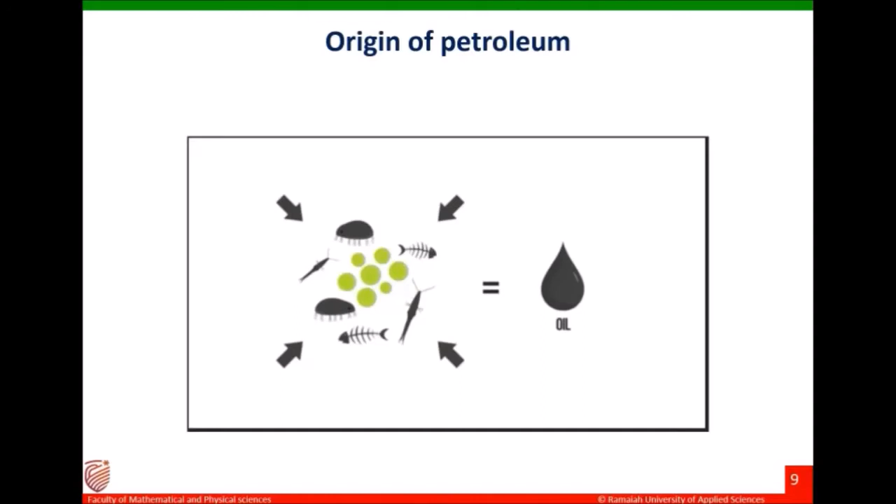Natural gas was formed by the same process as oil but was exposed to more pressure and heat, causing it to further decompose and turn into gaseous form. At the molecular level, oil and gas are hydrocarbons made up of hydrogen and carbon atoms.

The constant pressure and movement of the Earth's crust squeezes the oil and gas through the pores or spaces within the rocks. Some oil and gas reaches the Earth's surface and seeps out naturally into land or water. Often, it is trapped beneath the surface by impermeable layers of rock structures like rock faults.

Within the crust, oil or gas deposits build up and form reservoirs. Reservoirs are like vast sponges filled with oil and gas. They can be as large as a city.

To find oil and gas deposits, geologists use a number of different survey techniques, including seismic surveys, gravitational surveys, and geological mapping. Seismic surveys use reflected sound waves to produce a 3-dimensional view of the Earth's interior. New technologies such as 4-dimensional projections and sophisticated graphic renderings of rock structures are improving the way we find conventional oil and gas deposits. Energy resources that are currently difficult or expensive to extract are called unconventional oil and gas.

Oil has become the most important source of energy since the mid-1950s and became the lifeblood of the industrialized nations. Its products underpin modern society, mainly supplying energy to power industry, heat homes, and provide fuel for vehicles and aeroplanes to carry goods and people all over the world.

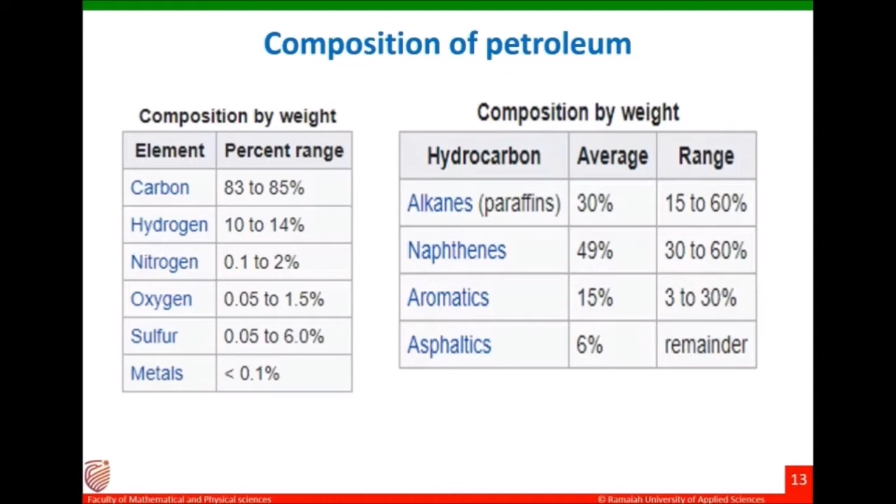What is petroleum refining? As such, petroleum cannot be used as a fuel. By the fractional distillation of petroleum, we can get useful products such as refinery gas, gasoline, naphtha, kerosene, diesel oil, lubricating oil, fuel oil, greases, wax and bitumen.

All these useful compounds differ in the number of carbon atoms present in their molecules. For example, refinery gas mainly contains hydrocarbons with 3 or 4 carbon atoms. Gasoline is a mixture of hydrocarbons where the number of carbon atoms in the hydrocarbon chains ranges from 7 to 9. For naphtha, it is 6 to 11. Kerosene is 11 to 18. Diesel oil is 11 to 18.

Lubricating oil, 18 to 25. Fuel oil, 20 to 27. Greases, 25 to 30. Bitumen, above 35.

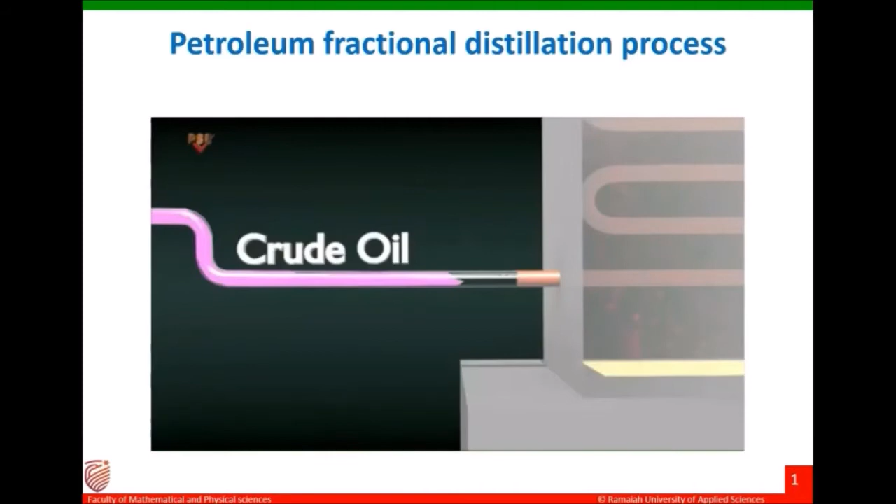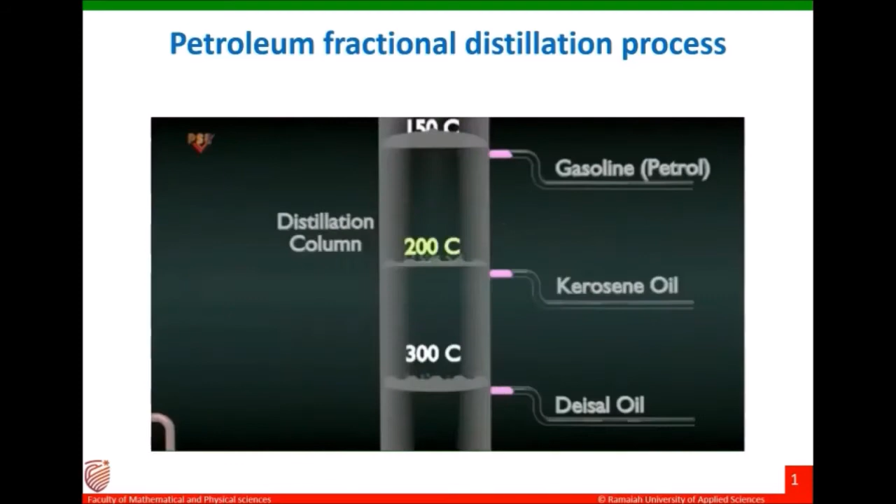To simplify the petroleum distillation process, we consider one distillation tower in which distillation takes place. Crude oil is supplied to a furnace before adding it into the distillation tower where it is heated. The heated mixture is fed into the bottom section of the tower. This bottom section is the hottest point, where the temperature can reach as high as 400 degrees Celsius. Components which are not vaporizable at this temperature become the lower bottom products. Components in vapor form rise up through a different series of distillation stages. The temperature decreases as the vapors rise through the tower and the components condense.

The products obtained from each distillation zone are known as product streams. Products from the distillation range from gases at the top to very high viscous liquids at the bottom. In all cases, these product streams are considered unfinished products, and further processing is required to make useful products. Light products separated at the top contain propane, butane and isobutane. This stream is also known as petroleum gas, and it can be liquefied to produce liquefied petroleum gas, or LPG.

Gasoline stream is used as a good fuel for automobiles. Naphtha stream can be utilized to convert to gasoline by the reforming process, which we will discuss in the next video. Kerosene can be treated to obtain jet fuels. Heavier oils such as fuel oil can be converted into useful fuels by cracking techniques, which we will study in the next video. The process depends on the quality of the petroleum as well as market demands. The lower products, asphalt or bitumen, are used for construction.

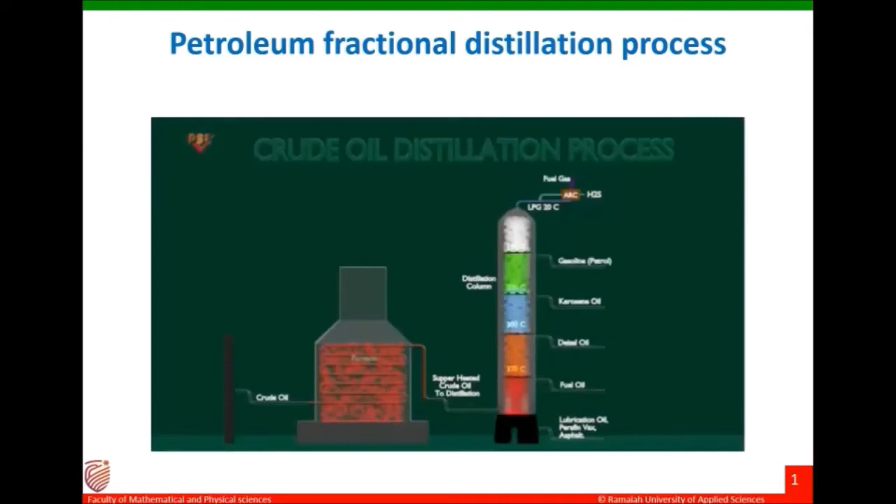Now we will summarize the petroleum distillation process. Crude oil from the field is a mix of hydrocarbons of different molecular lengths. By fractional distillation, the components in crude oil can be separated, and this process is known as petroleum distillation. During this process, low molecular weight hydrocarbons separate first due to their low boiling points, and higher molecular weight hydrocarbon mixtures separate later. Very high molecular weight hydrocarbon mixtures remain at the bottom of the distillation column.

Now we will summarize the video. In this video, the following questions were answered: How was crude oil formed on Earth's crust? What is the significance of petroleum in the present scenario? What is the composition of petroleum? What is the principle behind the separation of useful products from petroleum? Explain the petroleum distillation process. What are the products obtained from distillation of petroleum? Thank you for watching the video.

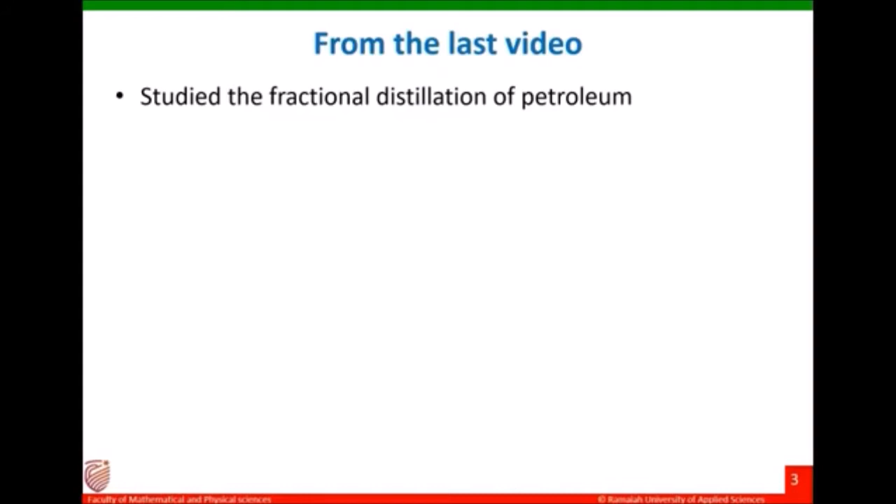From the last video, we studied about the fractional distillation process of petroleum to obtain useful products. The major products in the fractional distillation column are refinery gas, also known as petroleum gas, which contains 3 to 4 carbon atoms in their hydrocarbon chains.

Petrol contains 7 to 9 carbon atoms in their hydrocarbon chains. Kerosene, 11 to 18 carbon atoms. Naphtha, 6 to 11 carbon atoms. Diesel, 11 to 18 carbon atoms. Fuel oil, 20 to 27 carbon atoms. Lubricating oil, 18 to 25 carbon atoms. Waxes, 25 to 30 carbon atoms. Bitumen, above 35 carbon atoms.

The products separated during the fractional distillation process were based on their difference in boiling point. Lower molecular weight hydrocarbon based products, which separate at a lower temperature, for example refinery gas, petrol, etc. Higher molecular weight hydrocarbon based products are separated at higher temperatures, for example fuel oil, lubricating oil, etc. Very high molecular weight hydrocarbon based products will be at the bottom of the distillation column, and they won't vaporize in the column.

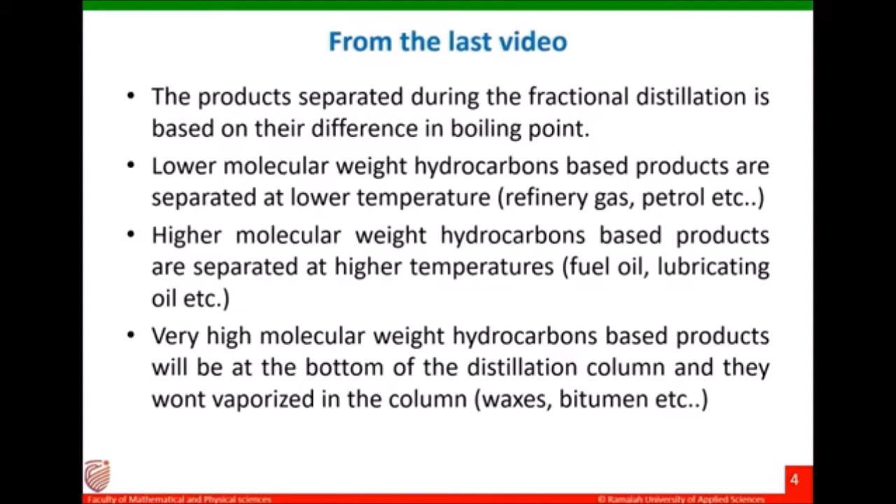For example, waxes, bitumen, etc. Among these fractional distillation products, which products are more useful? Widely used and more useful products are low molecular weight hydrocarbon based fuels, example refinery gas, petrol, etc. Higher molecular weight hydrocarbon based products such as fuel oil do not have much commercial value. Higher molecular weight oils are also known as heavy oils.

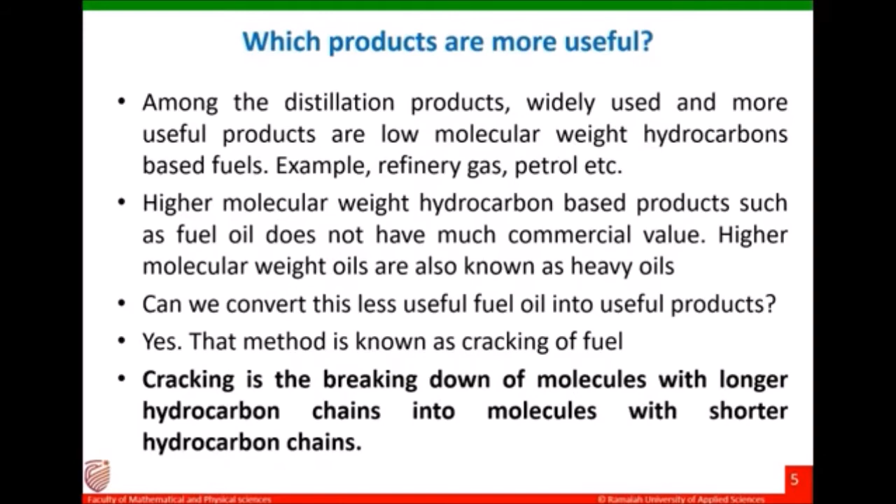Can we convert these less useful heavy oils into useful products? Yes, and that method is known as cracking of fuel. So the definition of cracking is this: cracking is the breaking down of molecules with longer hydrocarbon chains into molecules with shorter hydrocarbon chains.

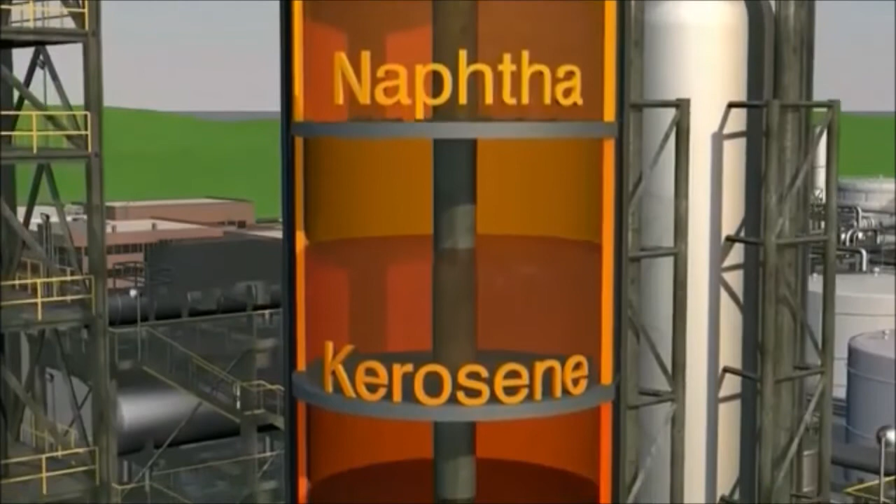This process you can achieve with the help of heat as well as stacks of trays. The liquid is easily collected and separated by weight. The lighter and medium weight liquids require less processing before they're ready to be used in cars and trucks. The heavier liquids need more processing to become useful.

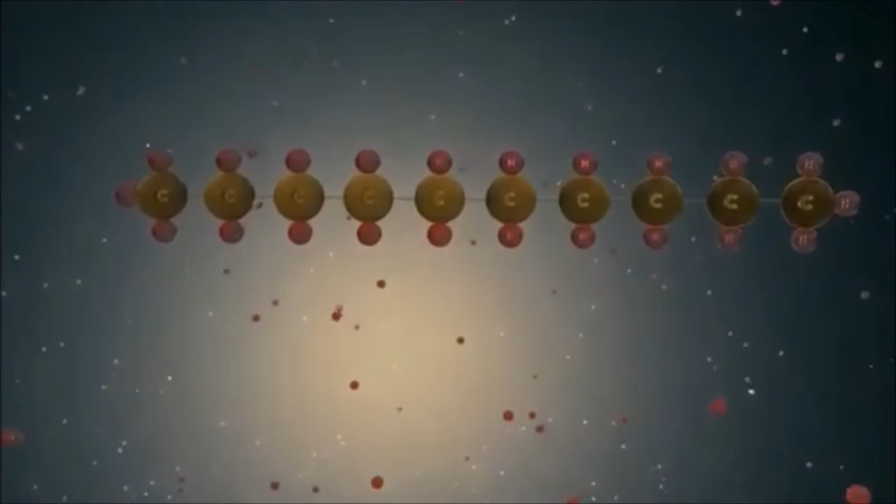A process called cracking is used to maximize the usefulness of heavy oil. Heavy oil has long strings of carbon and hydrogen molecules. Using a catalyst, these molecules can be broken into smaller chains, transforming the heavy oil into lighter, more valuable fluids.

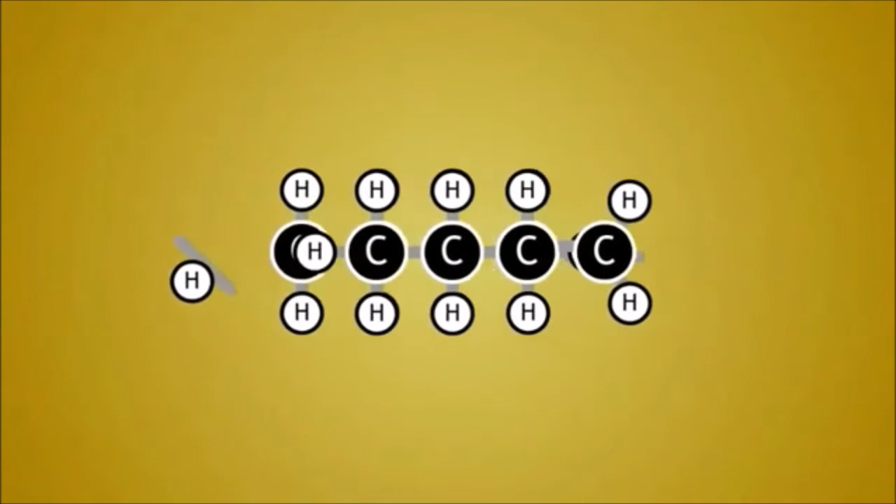We use a lot of fuels in our day-to-day lives, driving cars, aeroplanes, lorries, and even heating our homes. This means there is a very high demand for small-chain hydrocarbons. However, after fractional distillation, we find that we have a large supply of long-chain molecules. The process of cracking breaks down long-chain alkanes into a smaller alkane and alkene molecule.

This allows the supply of short-chain hydrocarbons to meet the demand for them, as the longer-chain alkanes are broken down into shorter alkanes and an alkene. The alkenes are also useful as these can be used in the manufacture of plastics.

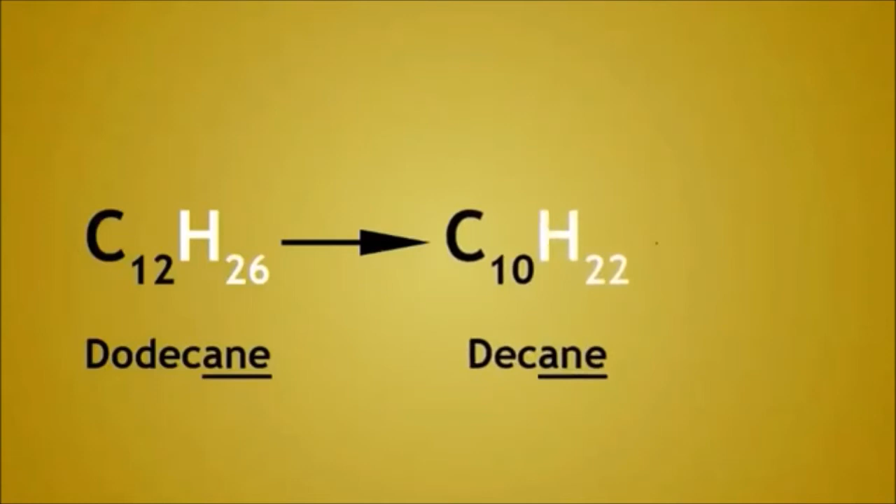Here is an equation showing that C12H26 is broken down into octane and butene. There isn't a set way that these molecules are broken down. In fact, C12H26 could also be broken down into decane and ethene, or even butene, pentane and propene, as these equations show. The large hydrocarbon is broken down in quite a random way. Just note that in each equation, since we had 12 carbon atoms and 26 hydrogens going into the reaction, the same must come out.

Types of cracking: cracking can be done with the help of heat, and that type of cracking is known as thermal cracking. Thermal cracking can be done in two different ways: liquid phase cracking and vapor phase cracking. Cracking can also be done with the help of a catalyst, which is known as catalytic cracking. Catalytic cracking can also be done in two different ways: fixed bed catalytic cracking and fluidized bed catalytic cracking. So cracking can be done in two different ways: thermal cracking and catalytic cracking.

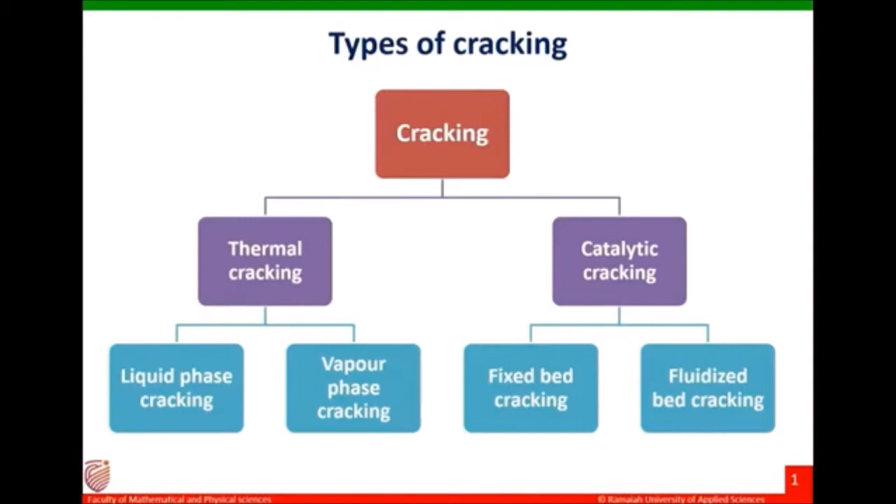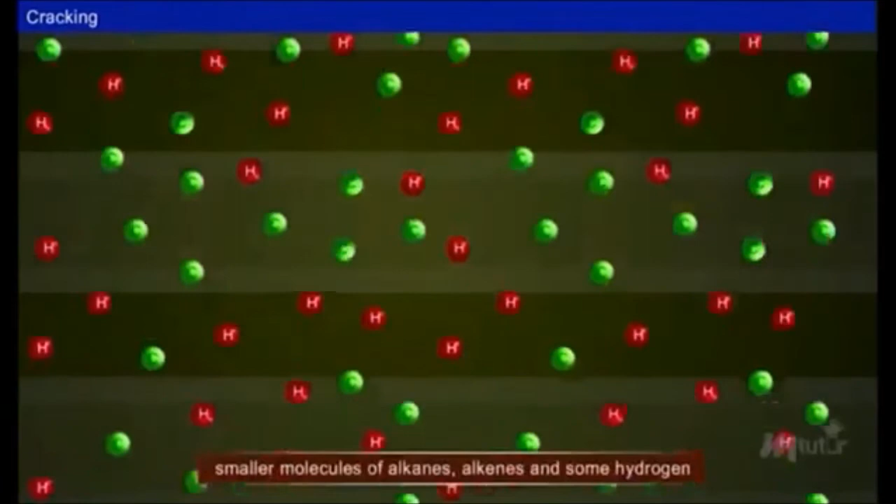Carbons. There are two methods of cracking in use: thermal cracking and catalytic cracking. Thermal cracking is cracking that is carried out by the application of heat and pressure. Here, the bigger hydrocarbon molecules break down to give smaller molecules of alkanes, alkenes, and some hydrogen. This process may be carried out either in liquid phase or vapor phase.

Liquid phase thermal cracking: the heavy oil is cracked at a temperature of 475 to 530 degrees Celsius and pressure of about 100 kilograms per square centimeter. The cracked products are then separated in a fractionating column.

Vapor phase thermal cracking: this type of cracking is suitable for oils which may be readily vaporized. The crude oil is first vaporized and then cracked at about 600 to 650 degrees Celsius under a low pressure of 10 to 20 kilograms per centimeter square.

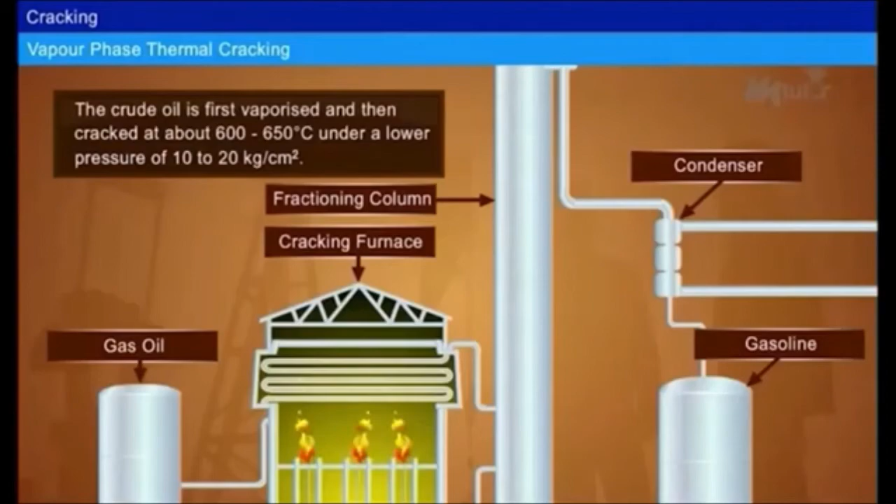Thermal cracking can be done in two ways: liquid phase thermal cracking and vapor phase thermal cracking. In liquid phase thermal cracking, heavy oil is pumped into the coil, kept at 420 to 550 degrees Celsius under a pressure of 15 to 100 kilogram per centimeter square. Here the pressure is quite high. Good quality of gasoline is produced at this temperature.

Gasoline with low octane value around 60 to 70 is obtained, which can be mixed with a higher octane value gasoline and then be used in automobile. What is octane number? That we will study in the next video.

Vapor phase thermal cracking: here the heavy oil is heated in a heater at 400 degrees Celsius to convert it into the vapors. Then these vapors are passed into the reaction chamber, which is maintained at a temperature of 600 to 650 degrees Celsius under the pressure of 10 to 20 kilogram per centimeter square. Here you see the pressure is lesser than that of liquid phase thermal cracking.

And the kind of petrol that we get is of high quality in vapor phase thermal cracking, where you can get an octane number up to 75 to 80.

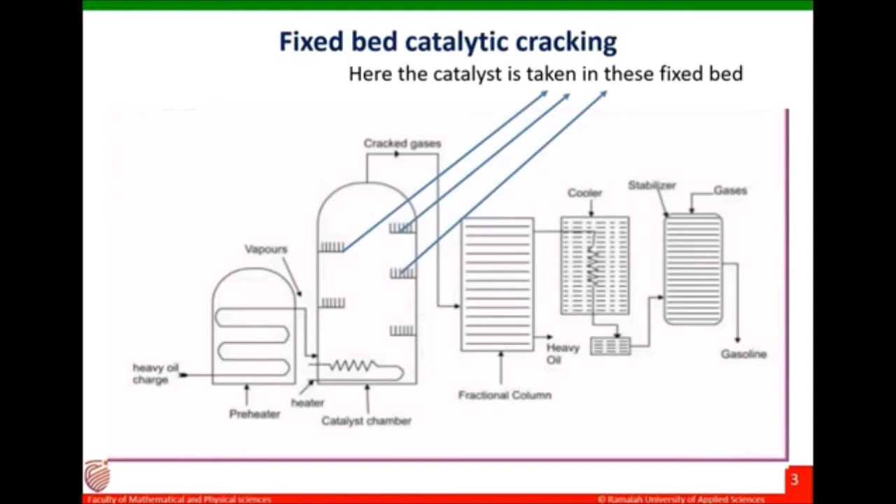Catalytic cracking can be done in two ways: fixed bed and fluidized bed. In fixed bed catalytic cracking, there is a catalyst chamber with beds where the catalyst is fixed, and heated heavy oil is passed through it. The oil is heated with the help of an electric heater, and that heated oil is passed to the catalyst chamber where the catalyst molecules collide with the heavy oil molecules, converting them into lower molecular weight hydrocarbons, which we can separate using a small fractional distillation column to get the lower molecular weight hydrocarbons.

So in fixed bed catalytic cracking, vapors of the heavy oil are heated in the presence of catalyst, due to which a better yield of petrol is obtained. Heavy oil is vaporized by heating in an electric heater, and vapors are passed over a series of trays containing the catalyst, generally using aluminum silicate, bentonite, bauxite, or zeolite. The reaction temperature will be somewhere around 425 to 540 degrees Celsius and a pressure of 1.5 kilogram per centimeter square.

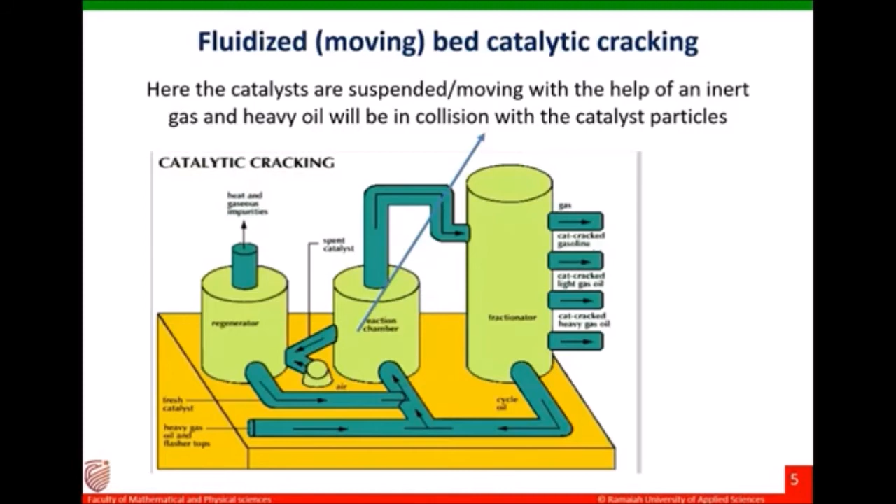In fluidized bed catalytic cracking, there is a reaction chamber where the catalyst is suspended or moving with the help of an inert gas. During this movement, heavy oil molecules collide with the catalyst particles, and the number of collisions is very high because of the movement of the catalyst. So the heavy oil molecules are converted or split into lower molecular weight hydrocarbons, which we can separate using a small fractional distillation column to get the lower molecular weight hydrocarbons separately.

So in fluidized bed catalytic cracking, we supply heavy oil fraction, and the catalyst generally used is aluminum oxide and silicon dioxide, which should be in finely powdered form. Temperature should be 550 degrees Celsius, pressure 1 to 2 atmosphere, and time only 3 to 4 seconds. That's why fluidized bed catalytic cracking is now widely used in industries, mainly in refineries, with a production yield around 70%.

So in this video we learned what is cracking, why it is necessary in the petroleum industry, types of cracking and their characteristics.

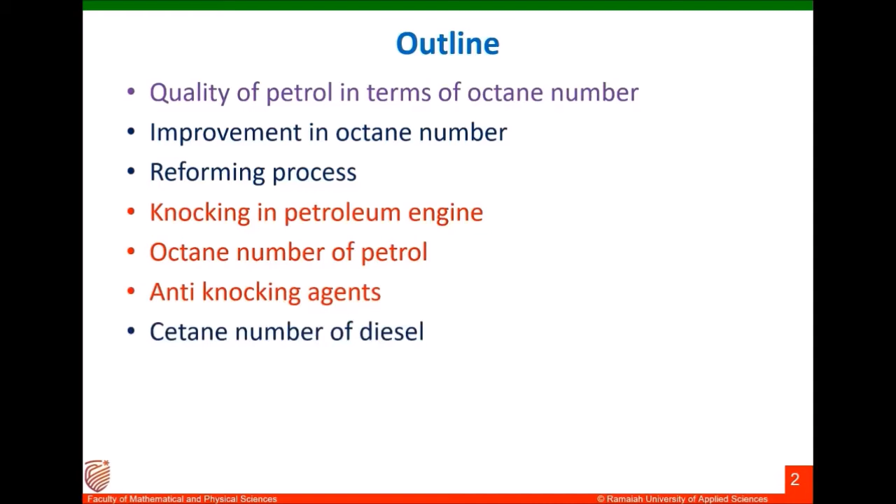In the previous video lectures, we studied that petrol or gasoline is derived from crude oil by the fractional distillation process. We also studied that the distillation products need further processing to use as finished fuel products. Quality of the fuel products depends on the source and quality of crude oil, the fractional distillation process, and the post-fractional distillation processes that we do after fractional distillation.

Quality of gasoline or petrol is mainly determined by its octane number. We will study about octane number and its definition by the end of this video lecture. If the gasoline has a higher octane number, it will create less knocking in the engines. If it has a lower octane number, it will create larger knocking in the engines. We will also study about knocking by the end of this video lecture.

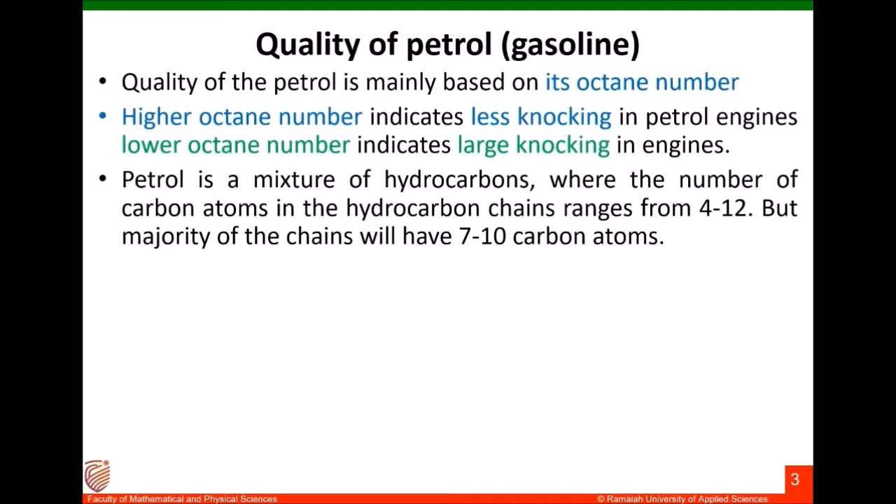Petrol is a mixture of hydrocarbons where the number of carbon atoms in the hydrocarbon chains ranges from 4 to 12, but the majority of chains have 7 to 10 carbon atoms. The hydrocarbons present in petrol are paraffins or alkanes, olefins or alkenes, cycloalkanes, cycloalkenes, aromatic compounds, etc. Among these hydrocarbons, some compounds are linear, some are branched, and some are cyclic and aromatic.

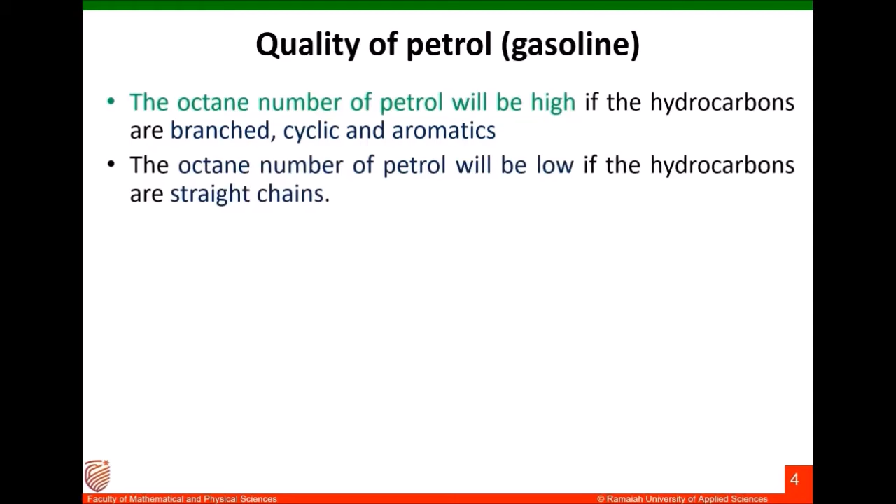If the hydrocarbons in petrol are majorly branched, cyclic and aromatic, then the octane number of petrol will be high. If the hydrocarbons in petrol are straight linear chains, then the octane number will be low. A significant amount of petroleum products such as naphtha contain mainly straight chain hydrocarbons, and similarly, petrol obtained from petroleum also contains a significant amount of straight chain hydrocarbons. Straight chain hydrocarbons lead to lower octane number and more knocking, which is a rattling sound in engines.

How to increase the octane number? How to decrease the knocking in petrol engines? If we can convert these linear straight hydrocarbons into branched or cyclic hydrocarbons, the octane number of the petrol will be increased, and this process is known as the reforming process.

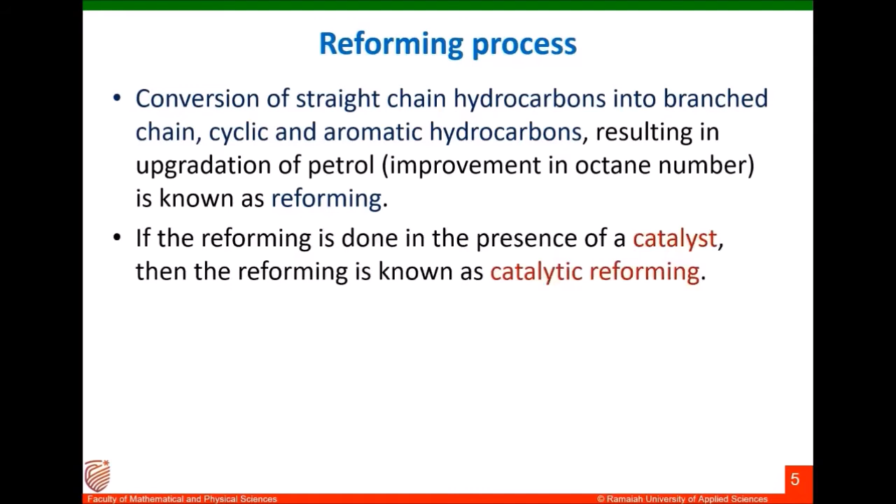Reforming is the conversion of straight chain hydrocarbons into branched chain, cyclic and aromatic hydrocarbons, resulting in upgradation of petrol, that is improvement in octane number. This is known as reforming. If reforming is done in the presence of a catalyst, it is known as catalytic reforming. For example, linear hexane into cyclohexane.

Mainly four types of catalytic reforming processes are being used: isomerization reaction, hydrocracking, dehydrogenation reaction, and dehydrocyclization reaction.

In this case, linear and straight hydrocarbons are converted into branched hydrocarbons, thus improving the octane number. This can be achieved with the help of heat and catalyst.

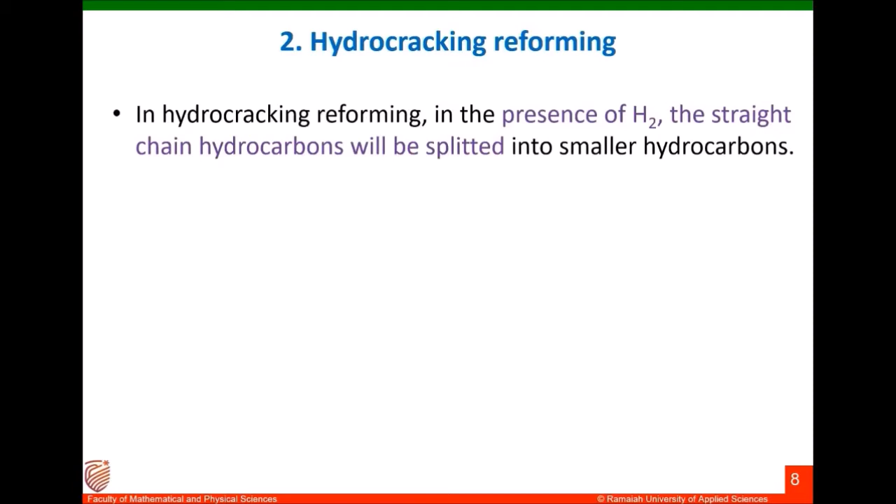Second, hydrocracking reforming. In hydrocracking, in the presence of hydrogen, straight chain hydrocarbons are split into smaller hydrocarbons. The word hydrocracking came from using hydrogen to crack longer linear hydrocarbons into shorter ones. For example, normal heptane with hydrogen is cracked into smaller hydrocarbons such as propane and butane. Similarly, decane is cracked with hydrogen to produce two smaller hydrocarbons of pentane.

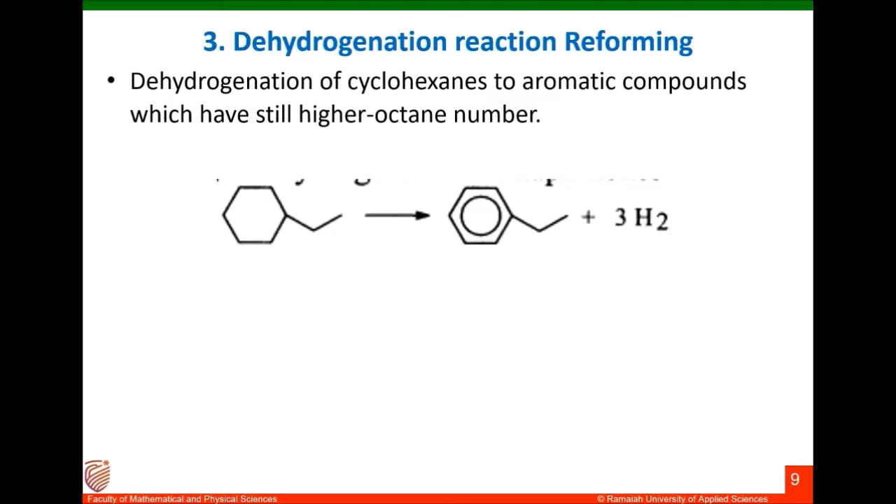Third technique, dehydrogenation reaction reforming. In this process, cyclic hydrocarbons remove hydrogen from their structures and become aromatic hydrocarbons, which have much higher octane number than cyclic hydrocarbons. Here you see a cyclic hydrocarbon remove 3 hydrogen molecules from its structure and become an aromatic hydrocarbon. By doing this, the octane number of the fuel increases.

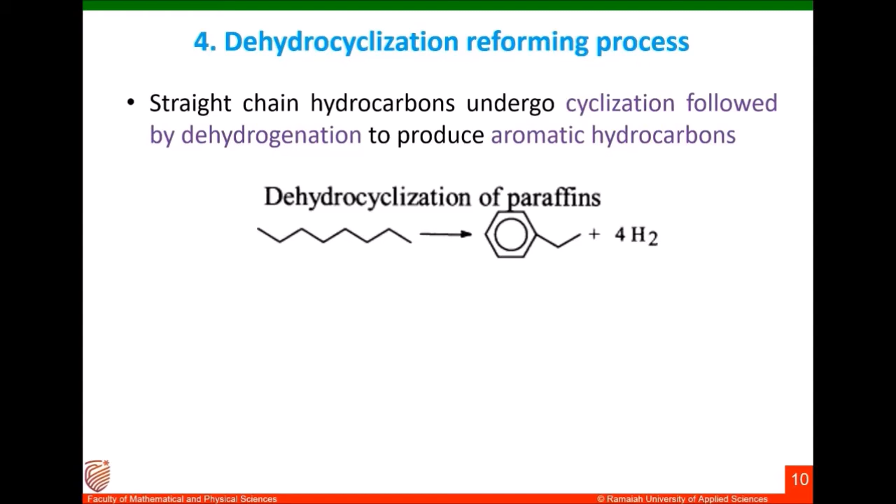Now we can conclude the reforming process. Reforming is essential to produce high quality, high octane number petrol from the naphtha stream and low quality gasoline obtained from fractional distillation of crude oil. By converting straight chain hydrocarbons into branched, cyclic and aromatic hydrocarbons, the octane number of fuel is improved.

If there is something everyone can agree on, it's that cars can make weird noises. It could be a squeal, a clunk, or even a rumble and roar. If the sound is closer to a knock, you may be dealing with problems under the hood, problems that could cause engine damage if left unresolved.

We know that combustion of fuel in the engine generates energy for the vehicle. The fuel-air mixture is compressed, undergoes combustion, and produces energy. However, at high compression ratios, depending on the composition of the fuel, premature combustion of part of the compressed air-fuel mixture in the cylinder produces intense high frequency pressure waves.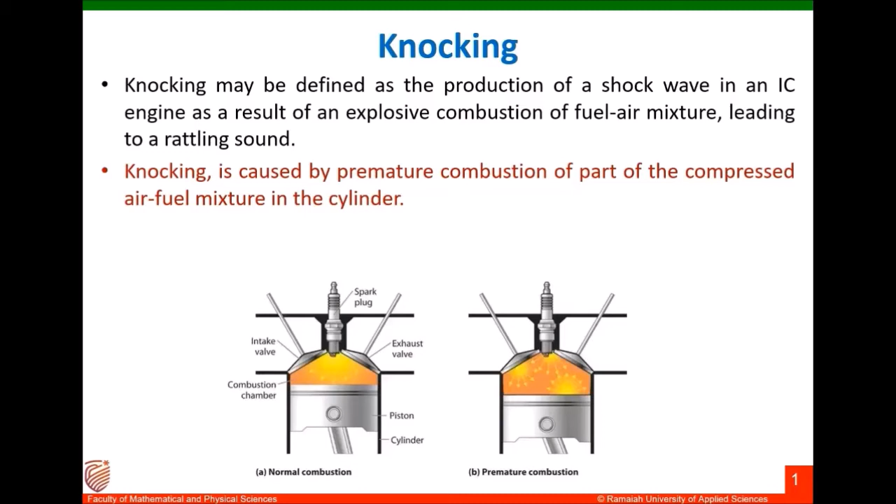These pressure waves force parts of the engine to vibrate, which produces an audible knock. Knocking may be defined as the production of a shock wave in an IC engine as a result of explosive combustion of the fuel-air mixture, leading to a rattling sound. Knocking is caused by premature combustion of part of the compressed air-fuel mixture in the cylinder, and is mainly due to faulty spark of the engine, low octane fuel, and carbon deposits in the engine.

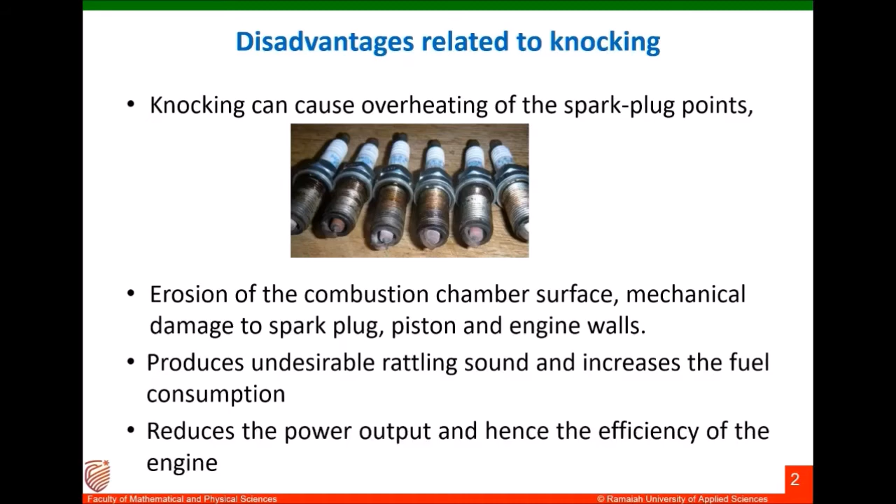Knocking can cause overheating of the spark plug points, erosion of the combustion chamber surface, and rough combustion chamber surface and inefficient operation. It can be avoided by adjusting certain variables of engine design and operation, such as compression ratio and burning time. But the most common method is to burn gasoline of higher octane number.

When gasoline engines became more powerful in the 1920s, it was discovered that some fuels knocked more readily than others.

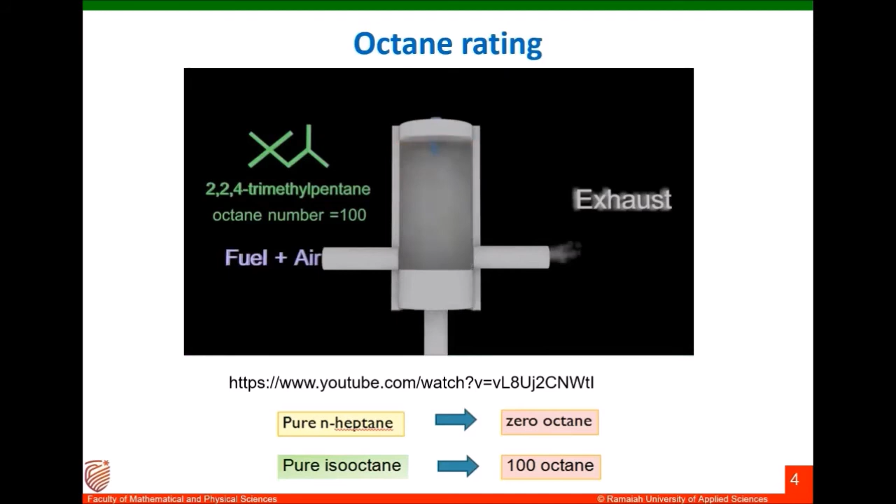Knocking occurs when fuel burns unevenly in your engine's cylinders. When cylinders have the correct balance of air and fuel, fuel will burn in small regulated pockets instead of all at once, like sparklers, not like fireworks. After each pocket burns, it creates a little shock, igniting the next pocket and continuing the cycle. Engine knocking happens when fuel burns unevenly and those shocks go off at the wrong time. The result: an annoying noise and potential damage to your engine's cylinder walls and piston.

Experimental studies led to the determination that of the standard fuels available at the time, the most extreme knock was produced by a fuel composed of pure normal heptane, while the least knock was produced by pure isooctane. Isooctane is 2,2,4-trimethyl pentane. This discovery led to the development of the octane scale for defining gasoline or petrol's quality.

If you use 2,2,4-trimethyl pentane as a fuel, it will create the least knocking. So the octane rating or octane number is 100 for this compound. The highly branched structure makes this compound have less knocking. If you take pure n-heptane as a fuel, it will create maximum knocking due to its linear structure, and therefore the knocking rating or octane number is 0.

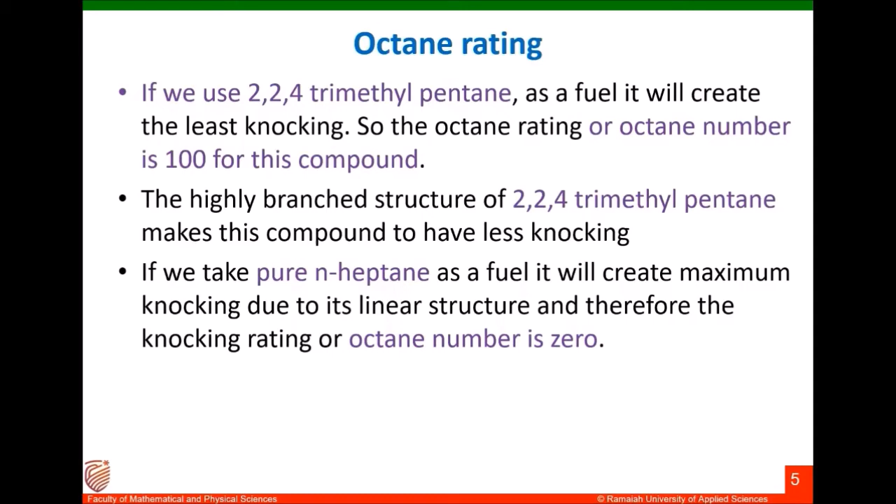Now consider a gasoline fuel sample with an octane number of 85. It means that it will produce the same level of knocking as a mixture containing 85% 2,2,4-trimethyl pentane and 15% n-heptane. Similarly, a petrol sample with a 78 octane number indicates that this fuel produces the same level of knocking as a mixture containing 78% 2,2,4-trimethyl pentane and 22% n-heptane.

One important thing to note: a sample petrol with an octane number of 80 does not mean that the petrol contains 80% 2,2,4-trimethyl pentane and 20% n-heptane. It only means that the fuel produces the same level of knocking as a mixture of 80% 2,2,4-trimethyl pentane and 20% n-heptane. Reforming is the process to get high quality, high octane number petrol from naphtha distillate and from lower quality petrol.

Now we will study the chemistry of knocking. Wheeler et al. in 1948 found that knocking is connected with the production of peroxide in the last part of the fuel-air mixture to be burnt. In order to understand this mechanism, we will consider ethane as a fuel.

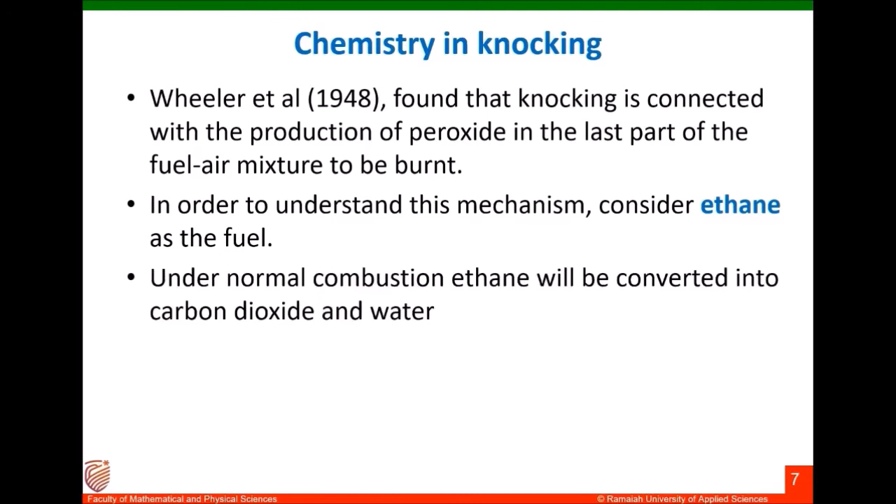Under normal combustion, ethane will be converted into carbon dioxide and water, as shown in the equation. But during knocking, instead of this single reaction, improper combustion will take place and a different series of reactions will occur compared to normal combustion.

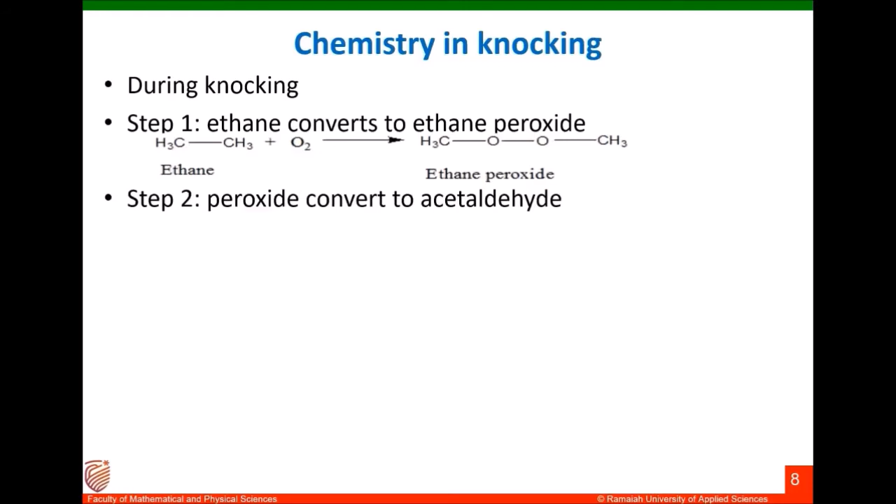For example, during knocking, the first step will be the conversion of ethane to ethane peroxide. The second step will be the peroxide conversion to acetaldehyde. The third step will be the conversion of acetaldehyde to formaldehyde. And the last step will be formaldehyde into carbon dioxide and water. So this series of reactions happens during the improper combustion of knocking.

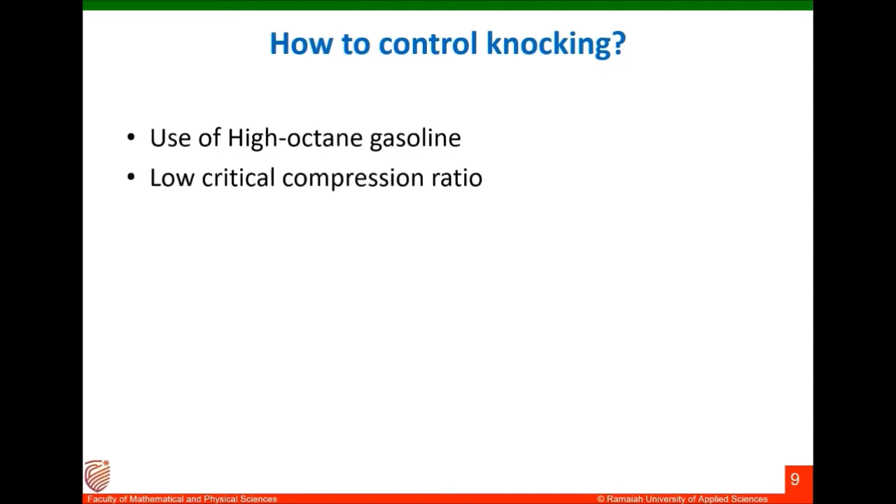How to reduce knocking? We can use high octane gasoline, or get a low critical compression ratio, or use anti-knocking agents such as tetraethyl lead, tetramethyl lead, methyl tertiary butyl ether, ethyl tertiary butyl ether, amyl alcohol, etc. An anti-knocking agent is a chemical substance added to petrol to improve its anti-knocking property.

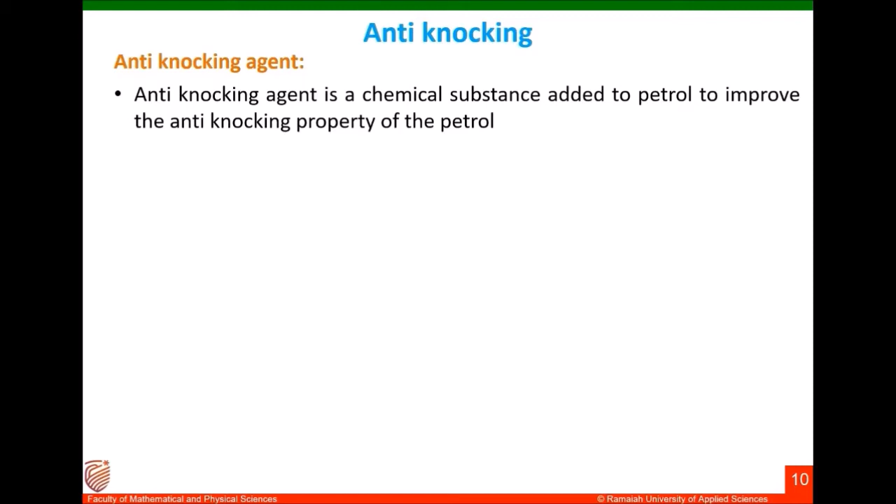For example, tetraethyl lead and tetramethyl lead were used in the 80s and 90s to reduce knocking due to petrol, but now they are phased out. They are no longer used because of the poisonous nature of lead. Nowadays, people use methyl tertiary butyl ether, ethyl tertiary butyl ether, and tertiary amyl alcohol as anti-knocking agents. A small amount of this anti-knocking agent is mixed with petrol and used in petrol engines.

Why are we not using lead-based anti-knocking agents anymore? The first reason is pollution, because it's a toxic metal. The second reason is that the vehicle's catalytic converter has a rhodium catalyst, which will be inactivated if lead is present in the exhaust gas.

Next topic is cetane number. Cetane number or cetane rating is an indicator of the combustion speed of diesel fuel and the compression needed for ignition. It plays a similar role for diesel as octane rating does for gasoline. The cetane number is an important factor in determining the quality of diesel fuel, but not the only one. Other measurements such as energy content, density, lubricity, cold flow properties, and sulfur content also determine the quality of diesel fuel in addition to cetane number.

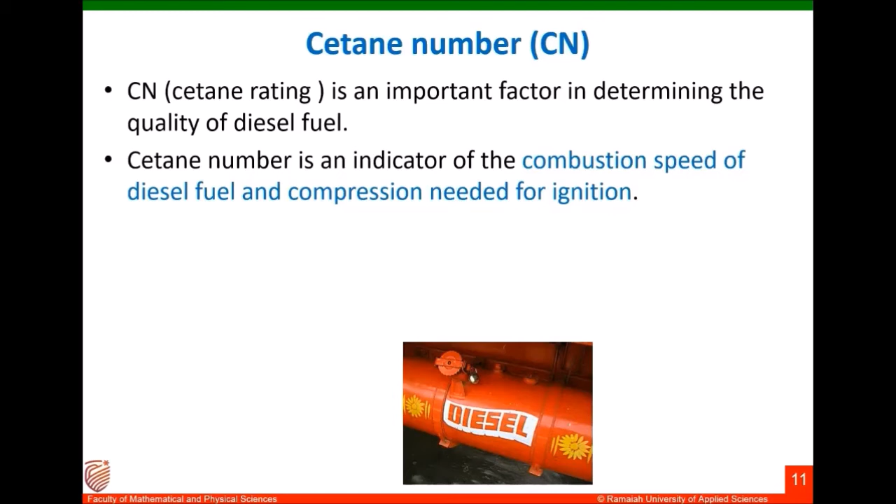Definition of cetane number: cetane number is an inverse function of a fuel's ignition delay. Ignition delay is the time period between the start of ignition and the first identifiable pressure increase during the combustion of the fuel. In a particular diesel engine, higher cetane fuel will have shorter ignition delay periods than lower cetane fuels.

Higher cetane number means it will take less time for ignition, having a shorter ignition delay. If a diesel has a lower cetane number, it will take a higher or longer ignition delay period.

Percentage of N-cetane present in the standard mixture of N-cetane and alpha-methyl naphthalene, which has the same ignition properties as that of the diesel under examination.

Let me explain this in a simple way. Generally, diesel engines operate well within a cetane number of 48 to 50. For example, a sample of diesel fuel having a cetane number of 48 means its ignition property is equal to a mixture of 48% cetane and 52% alpha-methyl naphthalene. Now I think you understood the statement.

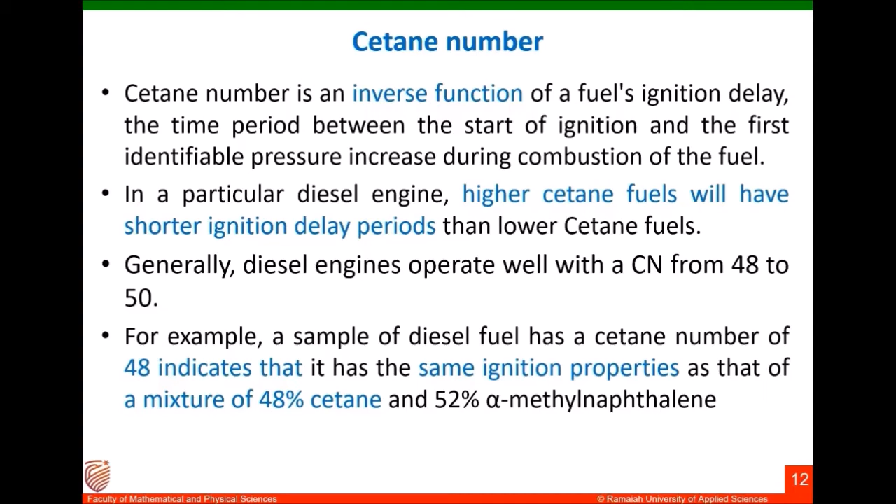Fuels with lower cetane number have longer ignition delays, requiring more time for the fuel combustion process to be completed. Hence, higher speed diesel engines operate more effectively with higher cetane number fuels.

So in this video lecture, the following points were discussed: the reforming process and its importance, knocking in engines and the reasons behind it, prevention or reduction of knocking, and octane number and cetane number for fuels.

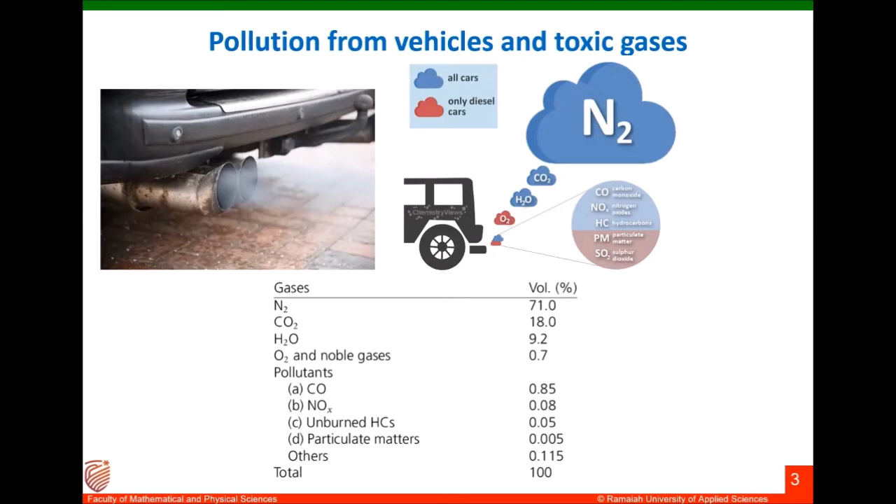How do we avoid these polluting gases in the exhaust from being released to the environment? The answer is the use of catalytic converters in vehicles - a device used to reduce emissions from an internal combustion engine, used in most modern day automobiles and vehicles.

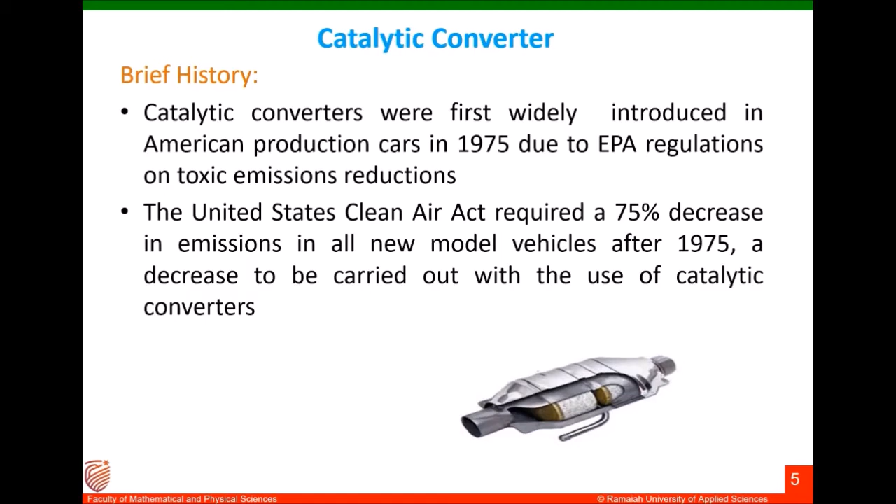Catalytic converters were first widely introduced in American production cars in 1975 due to EPA regulations on toxic emission reductions. The United States Clean Air Act required a 75% decrease in emissions in all new model vehicles after 1975, a decrease to be carried out with the use of catalytic converters.

First, reduction of nitrogen oxides into elemental nitrogen and oxygen. Second, oxidation of carbon monoxide to carbon dioxide. Third, oxidation of hydrocarbons into carbon dioxide and water. In these three reactions, we understand there is a conversion from hazardous gases to less hazardous substances.

There are a few limitations for catalytic converters. Higher temperature is required for functioning. It becomes damaged from road fragments. It becomes functionless after 80,000 kilometers. Also, unburned fuel damages the efficiency of the catalytic converter.

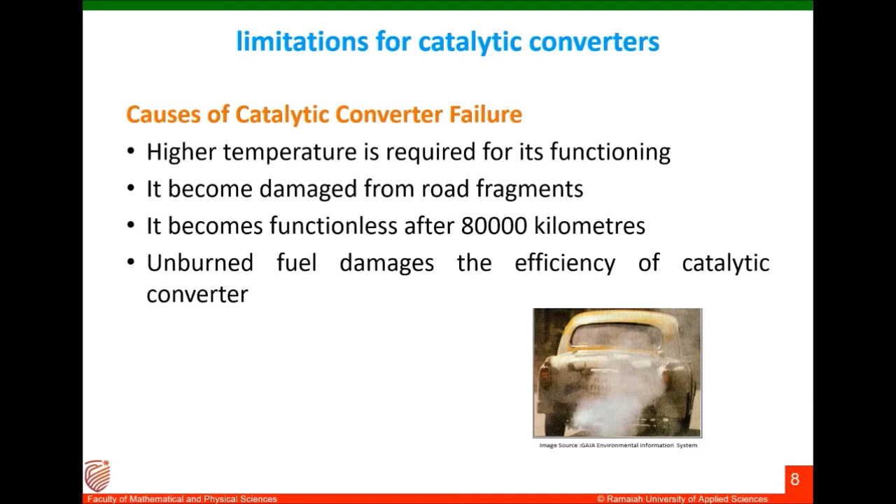How do we know when a catalytic converter is defective? These are the symptoms of defective catalytic converters: increase in fuel consumption of the vehicle, low response from the engine even when we accelerate, oxygen sensor alert, rattling noise due to soot deposition on the walls, and engine stopping frequently without a reason. So these are the symptoms of a defective catalytic converter.

Now, how can we extend the life of a catalytic converter?

Frequent maintenance of the vehicle is needed, along with reinstallation of the catalyst in the converter after a certain number of kilometers of usage. Generally, the palladium catalyst should be replaced after 80,000 kilometers. Also, use unleaded fuel in the vehicle.

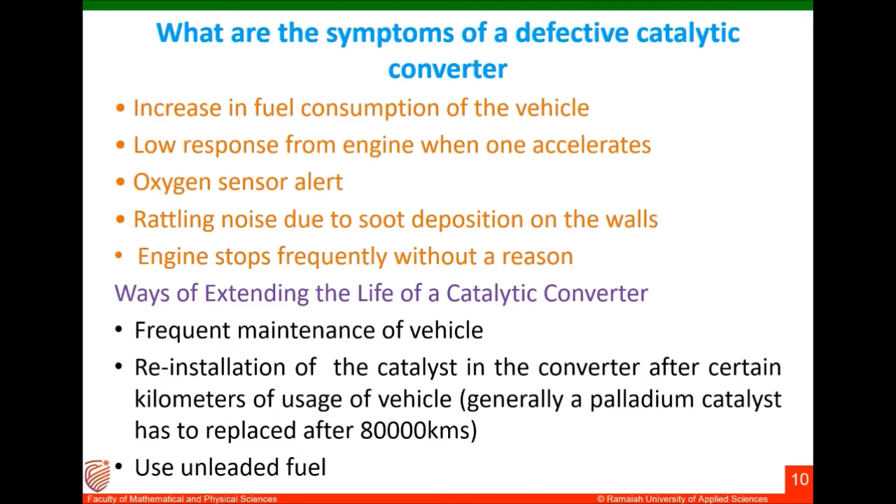As the world human population grows and with changing consumer demands, sustained economic development will depend upon a secure supply of raw materials as inputs for manufacturing needs. The majority of consumer goods are currently made from hydrocarbons produced by the petrochemical industry. Continued depletion of limited global natural resources supports the concept of supplying industrial production and energy needs through the use of renewable or bio-based resources.

A wide variety of industrial products, including biomaterials, fuels, and biochemicals, are already manufactured from bio-based raw materials, which can be divided into 3 broad groups: biomaterials, energy fuels, and biochemicals.

Biomass is an attractive energy source for a number of reasons. First, it is renewable as long as it is properly managed. It is also more evenly distributed over the Earth's surface than other finite petroleum based resources, and may be exploited using more environmentally friendly technologies. Biomass provides the opportunity for increased local, regional, and national energy self-sufficiency across the globe.

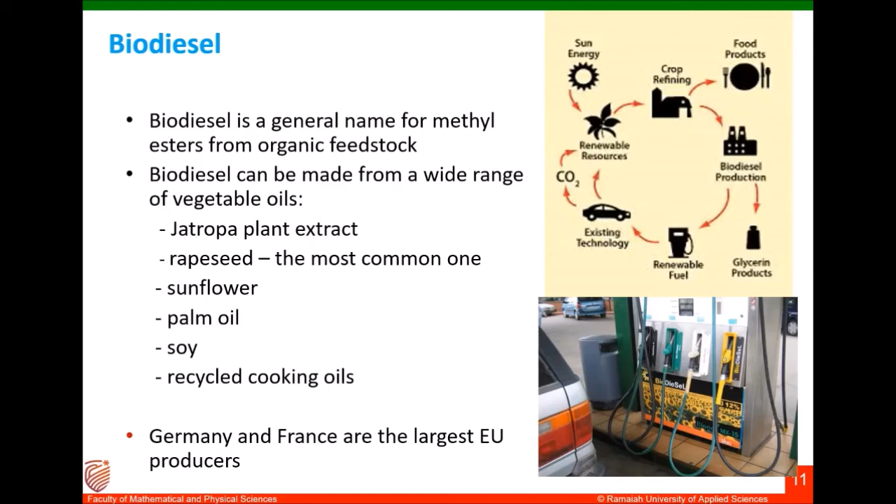Biodiesel is made by converting these oils and fats into esterified oil by transesterification, and the reaction is given in the formula. Oil or fat, when it reacts with alcohol, converts into glycerol and biodiesel, and biodiesel, as we can see, is methyl esters. The mechanism of this reaction is given here.

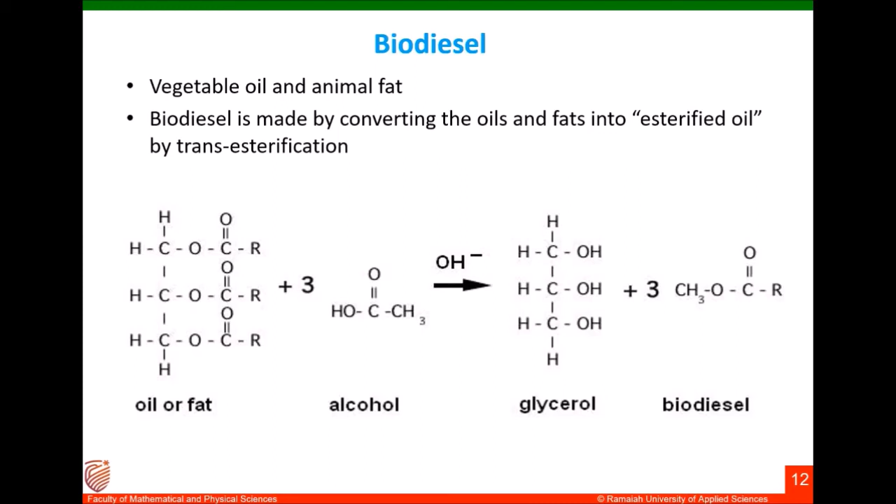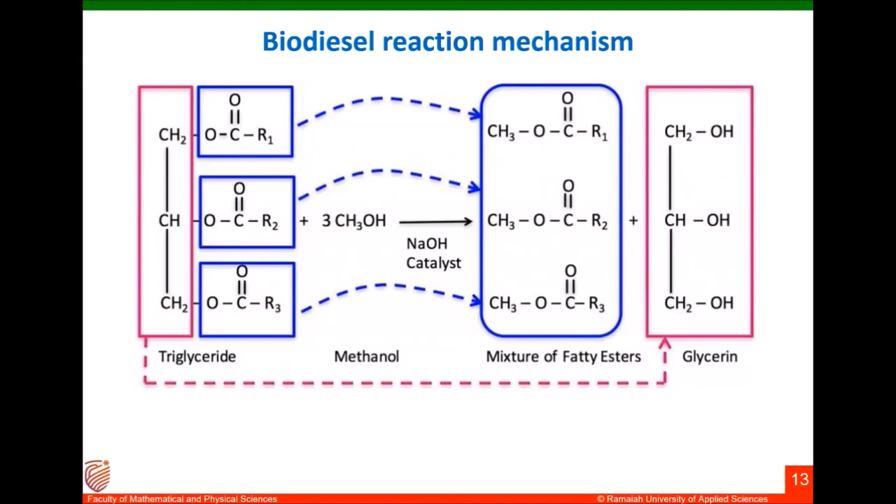The pre-treated oil and fats will be mixed with the methanol and catalyst, and the reaction will continue for a stipulated time at an optimum temperature. After the transesterification reaction, the glycerin and biodiesel will be formed, and the glycerin can be separated from the reaction mixture. Then the remaining biodiesel should be washed and dried.

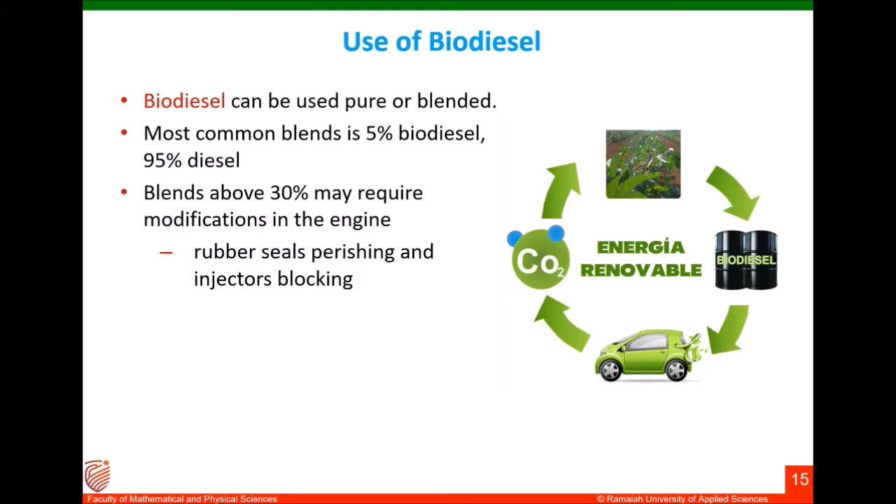Biodiesel can be used pure or in blended form. The most common blend is 5% biodiesel and 95% diesel in vehicles. Blends above 30% may require modifications in the engine, because using more biodiesel than diesel leads to rubber seals perishing and injectors blocking in the engine. So if you want to use pure biodiesel in a vehicle, the engine should be modified for its use.

Advantages of biodiesel: it is biodegradable, so less harmful if spilled, and it will degrade itself. It produces lower emissions than petroleum-based diesel. It is a renewable energy resource, with less hydrocarbon, carbon monoxide, and particulates released by combustion. Even though the emission of oxides of nitrogen is higher, that can be dealt with using catalytic converters in the vehicle.

Use of 100% biodiesel would reduce life cycle carbon dioxide emissions by 40 to 50%. Use of a 5% blend, that is 5% biodiesel and 95% petroleum based diesel, will reduce carbon dioxide emission by 2 to 2.5%. Biodiesel is eco-friendly.

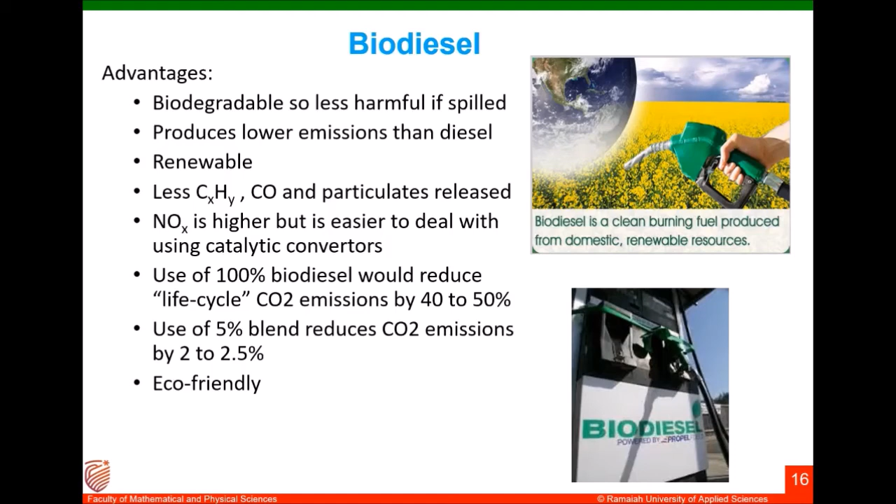Disadvantages: land is required for getting vegetable oil from crops, because to obtain vegetable oil we have to cultivate those crops, and for that we require land. Still emissions will occur, and it doesn't address the need to be more energy efficient. These are the disadvantages of biodiesel.

Another biofuel is alcohol. Alcohols can be used as octane enhancers for petrol.

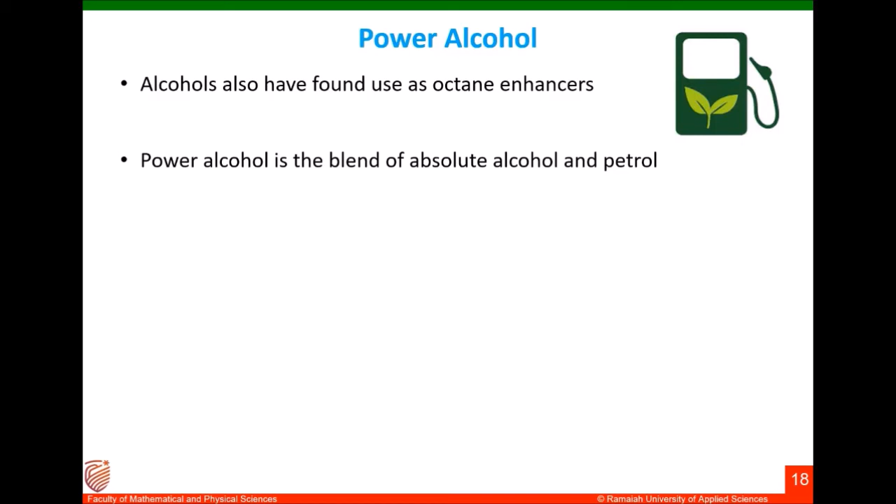By blending petrol with absolute alcohol, which means 100% alcohol without any water content, we can make power alcohol and use it in vehicles. Power alcohol is a mixture of 80% petrol, 20% ethanol, and a small amount of benzene.

Oxygen present in the alcohol aids in complete combustion of the hydrocarbons in petrol, thereby reducing peroxide formation, and hence knocking is reduced. We studied about knocking in my previous video lecture. Alcohol can be prepared from corns, molasses, etc.

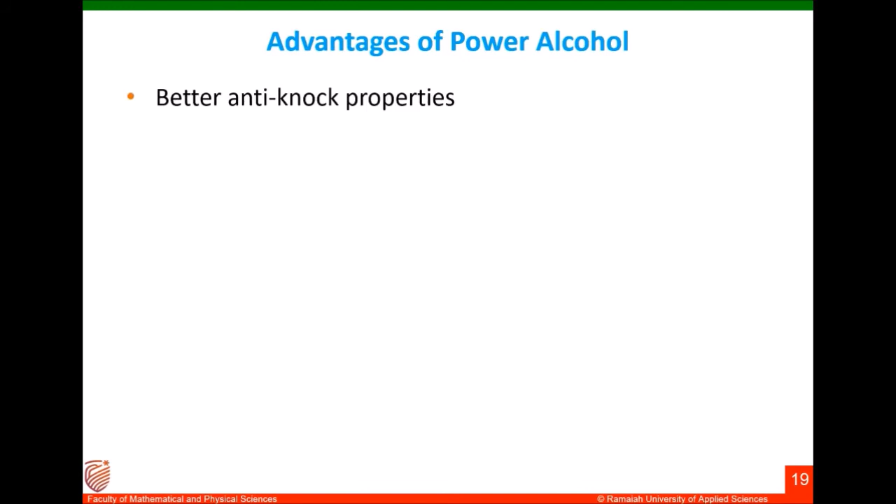Now, advantages of power alcohol. Power alcohol has better anti-knocking property and higher octane number. Alcohol blended petrol can be used in engines with a higher compression ratio, and there is no starting difficulty with alcohol-petrol blend in vehicles.

Air required for complete combustion is less in power alcohol powered engines. Ethyl alcohol contains oxygen atoms, which helps in complete combustion of power alcohol, thereby reducing carbon monoxide and volatile organic compound emissions, and it is economically cheaper.

But there are some disadvantages of power alcohol. Alcohol lowers the calorific value of petrol, and there is difficulty in starting the engine at lower temperature. At lower temperature you will face difficulty starting the engine of the vehicle.

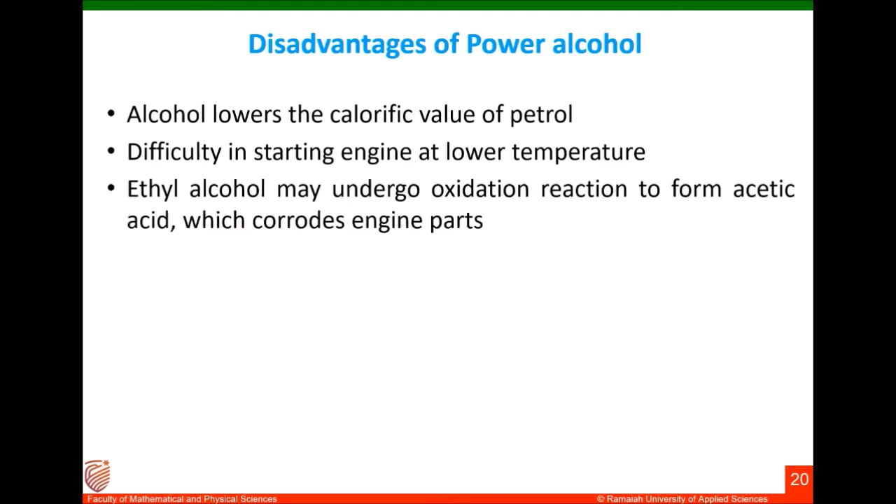Ethyl alcohol may undergo oxidation reaction to form acetic acid, which corrodes the engine parts. That is a concern. Ethyl alcohol contains an oxygen atom, and the amount of air required for complete combustion is less, so air regulation is required. Blending agents such as benzene or toluene are used, which is not good.

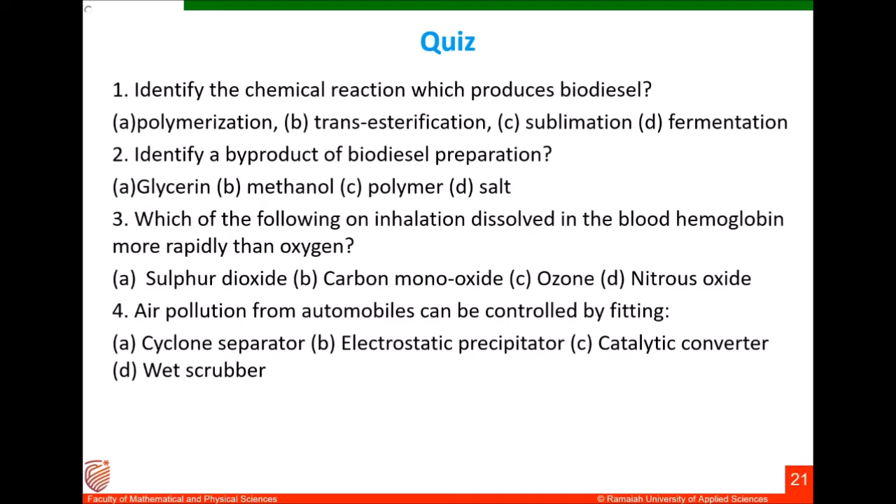Now we will summarize this video lecture. We studied about the function of catalytic converters. They are devices used to reduce the emission from the internal combustion engine.

Then we studied about biodiesel. They are biodegradable, less harmful if spilled, and produce lower emission than diesel, and are renewable. We also studied the preparation, characteristics, and advantages of biodiesel.

Then we studied about power alcohol, which has better anti-knocking properties and higher octane number, and alcohol blended petrol, that is power alcohol, can be used in engines with a higher compression ratio. Thank you for watching this video.

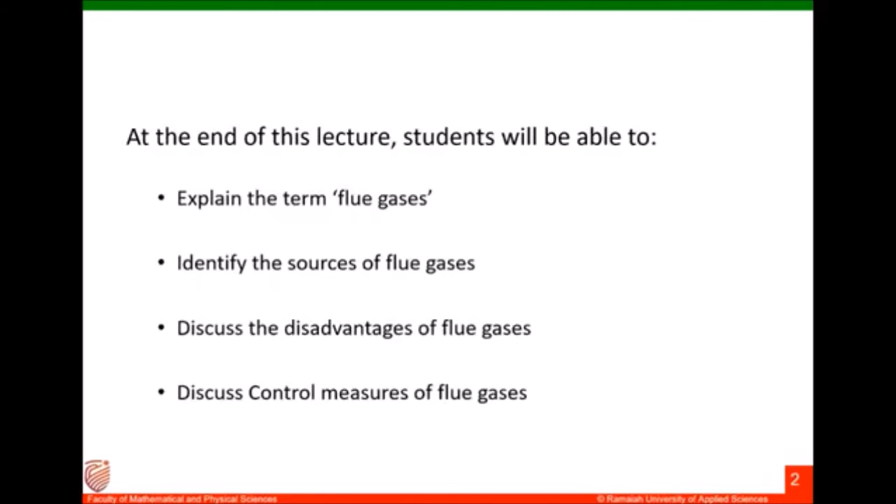Quite often, the flue gas refers to the combustion exhaust gas produced at power plants, especially thermal power plants. So the combustion product, or the exhaust gas coming out from power plants, is known as flue gas.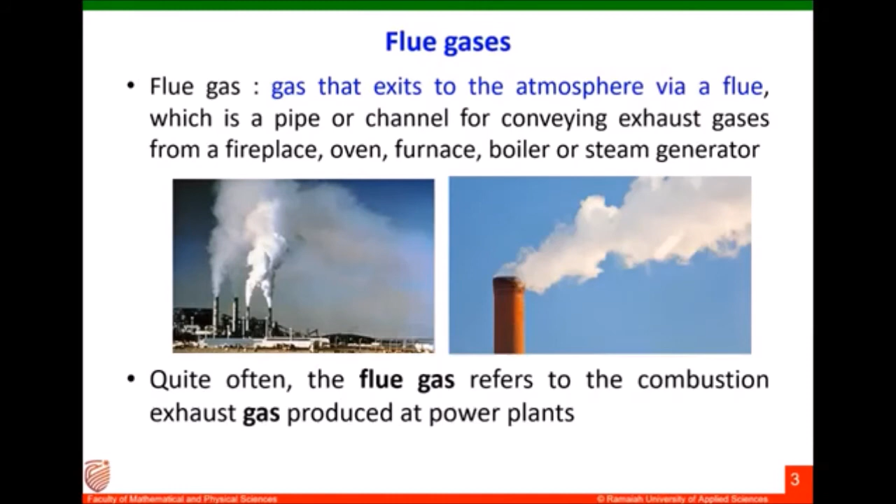Flue gas composition depends on what is being burned, but it will usually consist mostly of nitrogen. Typically more than two-thirds of the flue gas will be nitrogen, derived from the combustion of air, along with carbon dioxide, water vapor, and excess oxygen, which is also derived from the combustion of air.

It further contains a small percentage of pollutants such as particulate matter like soot, carbon monoxide, nitrogen oxides, and sulfur oxides. So the major components in flue gases are nitrogen, excess oxygen, carbon dioxide, soot, carbon monoxide, nitrogen oxides, and sulfur oxides.

Most fossil fuels are combusted with ambient air; we don't use pure oxygen. We normally burn fossil fuel in ambient air for generating power. Since ambient air contains about 79 volume percentage of gaseous nitrogen, which is essentially non-combustible, the largest part of the flue gas from most fossil fuel combustion is uncombusted nitrogen.

So why is two-thirds nitrogen? Because the ambient air used for combustion of the fossil fuel mainly contains nitrogen, so the non-combustible nitrogen will be the major part of the flue gas.

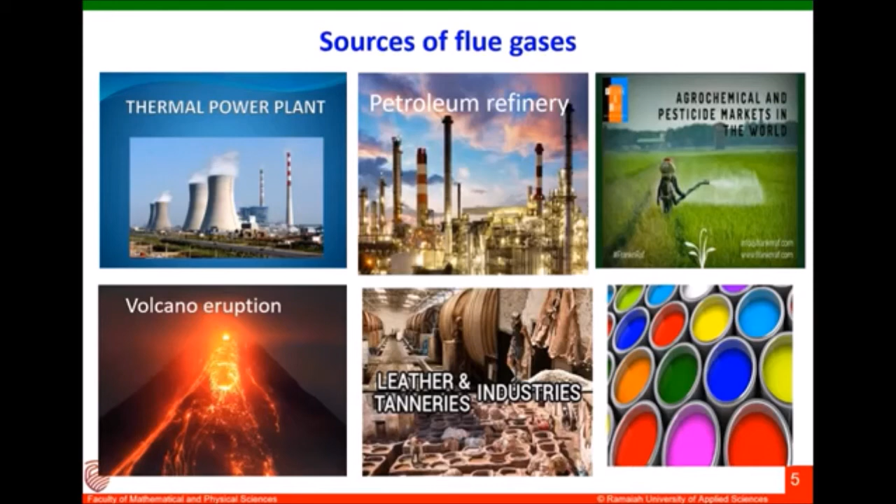One of the effects of flue gases in the atmosphere is acid rain. Acid rain results when sulfur oxides and nitrogen oxides are emitted into the atmosphere and transported by wind and air currents. The sulfur oxides and nitrogen oxides react with water, oxygen and other chemicals to form sulfuric acid and nitric acid. Then these acids mix with water and other materials before falling to the ground, especially during rain.

While a small portion of the sulfur dioxide and oxides of nitrogen that cause acid rain is from natural sources such as volcanoes, most of the time acid rain is due to the burning of fossil fuels. The major sources of oxides of sulfur and nitrogen in the atmosphere which cause acid rain are the burning of fossil fuel to generate electricity. Two thirds of sulfur dioxide and one quarter of oxides of nitrogen in the atmosphere come from electric power generators.

These sulfur dioxide and oxides of nitrogen are also produced from vehicles and heavy equipment, and also from manufacturing industries, oil refineries and other industries. After production from these industries, winds can blow this sulfur dioxide and oxides of nitrogen over long distances and across borders, making acid rain a problem for everyone, not just those who live close to those sources.

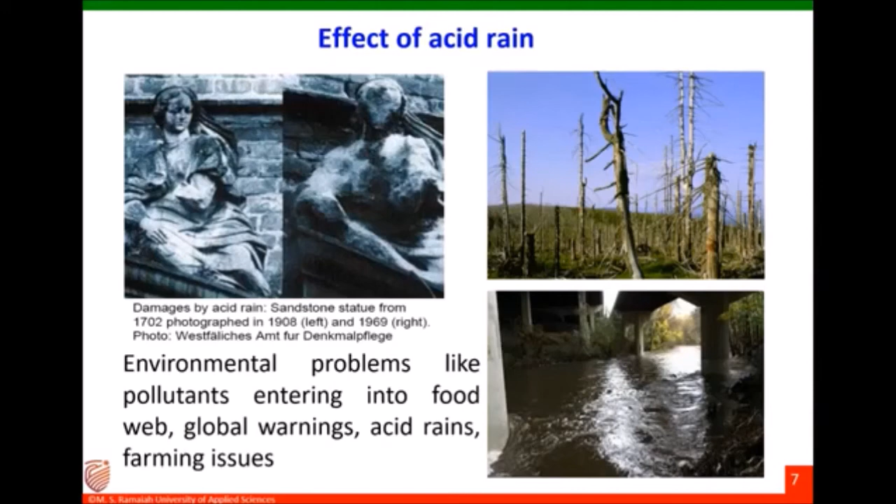We will concentrate on sulfur dioxide as a flue gas in the coming few minutes. Fossil fuels such as coal and oil contain a significant amount of sulfur. When fossil fuel is burned, about 95% of the sulfur is converted into sulfur dioxide.

High gas temperature of 800 degrees Celsius will favor the formation of sulfur dioxide into sulfur trioxide, because the fuel may contain some metals which can act as a catalyst for this reaction. So at high temperature and in the presence of metals in the fuel, the sulfur dioxide will be further oxidized to form sulfur trioxide. And in whatever way sulfur trioxide is formed, it does not behave like sulfur dioxide.

Sulfur trioxide forms a liquid aerosol known as sulfuric acid mist that is very difficult to remove. This mist is often the cause of the blue haze that appears as the flue gas plume dissipates. This problem is being addressed by the use of wet electrostatic precipitators, which we will study later.

How can we avoid or limit sulfur dioxide emissions? The principal approaches to controlling sulfur dioxide or sulfur trioxide emissions include the use of low sulfur fuel. If you use fuel containing very low amounts of sulfur, the amount of sulfur dioxide produced after combustion will be less. Another approach is reduction or removal of sulfur in the feed, and the use of appropriate combustion technology. If the fuel you are getting contains sulfur, then before combustion you remove that sulfur from the fuel. That is also one of the approaches.

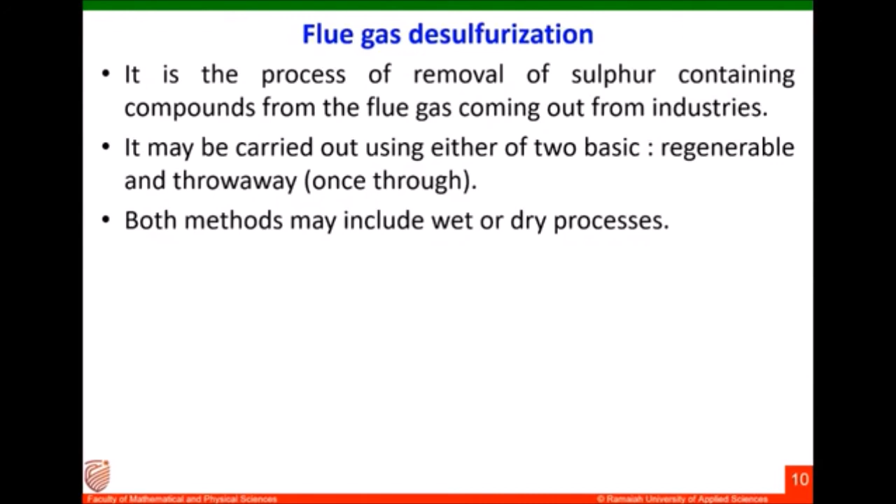Both methods may include wet or dry processes, depending on whether the process needs water. Currently, more than 90% of utility flue gas desulfurization systems use a wet throwaway system process, because throwaway systems use inexpensive scrubbing mediums that are cheaper to replace than to regenerate. Regenerating techniques are much costlier, but throwaway wet scrubbing systems are easier to perform and cheaper.

Regenerable systems use expensive adsorbents or sorbents that are recovered by stripping sulfur oxides from the scrubbing medium. We will study these techniques in detail later. These produce useful byproducts including sulfur, sulfuric acid, and gypsum. For example, if you can remove the sulfur and sulfuric acid from the flue gas and utilize it, you can get some money out of the flue gases.

Regenerable flue gas desulfurization generally has higher capital cost than throwaway systems, but lower waste disposal requirements and cost. So throwaway systems are cheap, but you will not be able to get money out of it. But if you can invest a huge amount of money and install a regenerating flue gas desulfurization technique, even though the initial cost and the sorbents are costlier, you will be able to recover the sulfur oxides and use them for making sulfuric acid and other products.

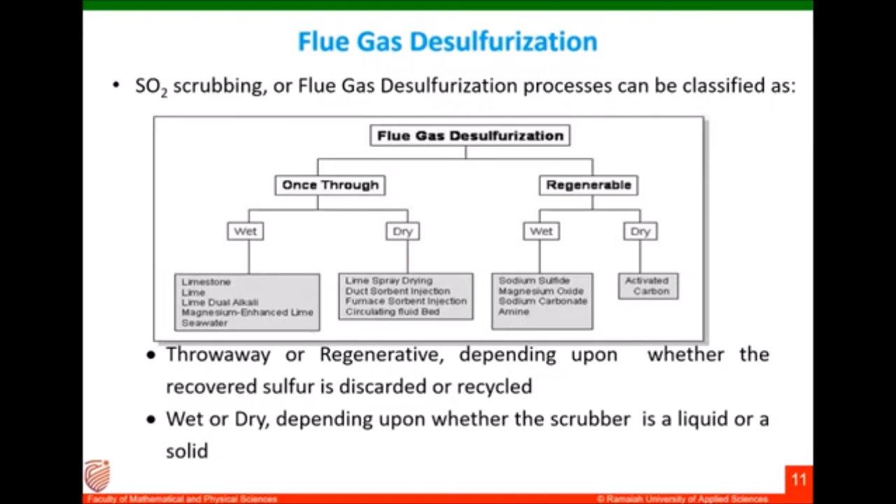Flue gas desulfurization techniques can be categorized as shown in this chart, and we will study each technique in detail. The major flue gas desulfurization processes are limestone scrubbing, lime scrubbing, dual alkali processes, lime spray drying, and the Wellman-Lord process.

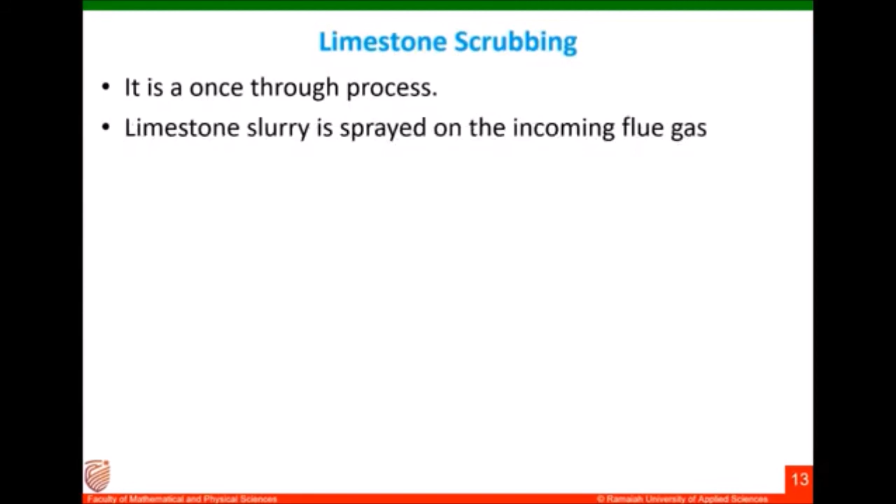First we will study about limestone scrubbing. It is a once-through process. Limestone slurry is sprayed on the incoming flue gas, so the sulfur dioxide in the flue gas gets absorbed. The reaction for removing sulfur dioxide is given as limestone, calcium carbonate, absorbing sulfur dioxide to form calcium sulfite. This calcium sulfite can be used to prepare gypsum.

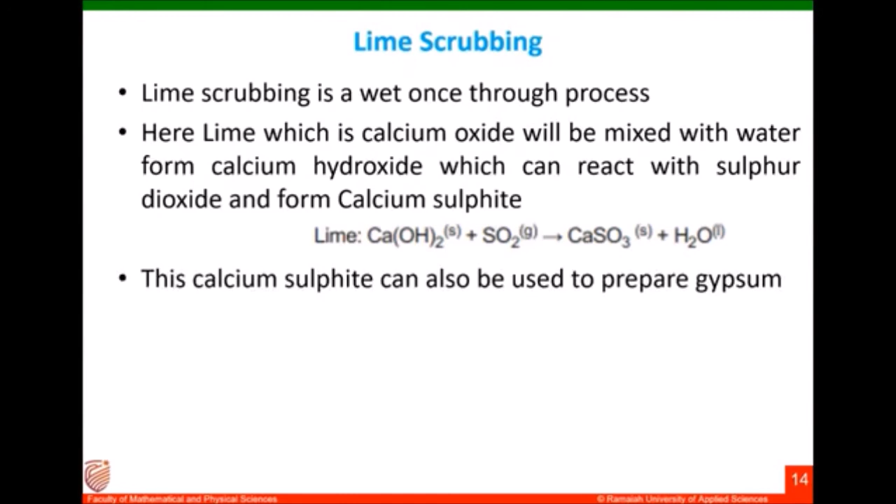Second technique is lime scrubbing. Lime scrubbing is a wet once-through process. Here, lime, which is calcium oxide, is mixed with water to form calcium hydroxide. This calcium hydroxide reacts with the sulfur dioxide in the flue gas to form calcium sulfite, as in the equation calcium hydroxide plus sulfur dioxide gives calcium sulfite. This calcium sulfite can also be used to prepare gypsum. Now, what are the major disadvantages of these two methods, limestone scrubbing and lime scrubbing?

Lime and limestone scrubbing lead to deposits inside the tower. The final product is calcium sulfite, and this deposit may block the nozzles through which the scrubbing slurry is sprayed, since normally in limestone and lime scrubbing we are spraying a slurry.

Compared to limestone scrubbing, lime scrubbing is expensive because the cost of calcium oxide is much higher than that of calcium carbonate. The third technique is the dual alkali system.

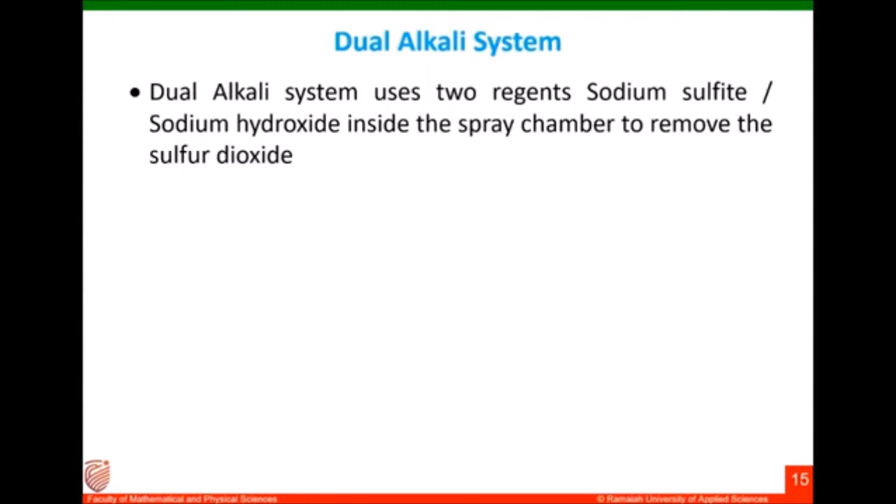The dual alkali system uses two reagents, sodium sulfite and sodium hydroxide, inside the spray chamber to remove sulfur dioxide. The resulting products are sodium salts: sodium sulfite and sodium sulfate ions are precipitated, and we can regenerate sodium hydroxide. So the sodium hydroxide reactant we put in to remove sulfur dioxide, we get back, but whatever sodium sulfite we supply, we will not get back.

The system has zero liquid discharge and eliminates the need for a wastewater discharge permit. This process will not produce any wastewater as a byproduct, so we don't require any wastewater treatment plant.

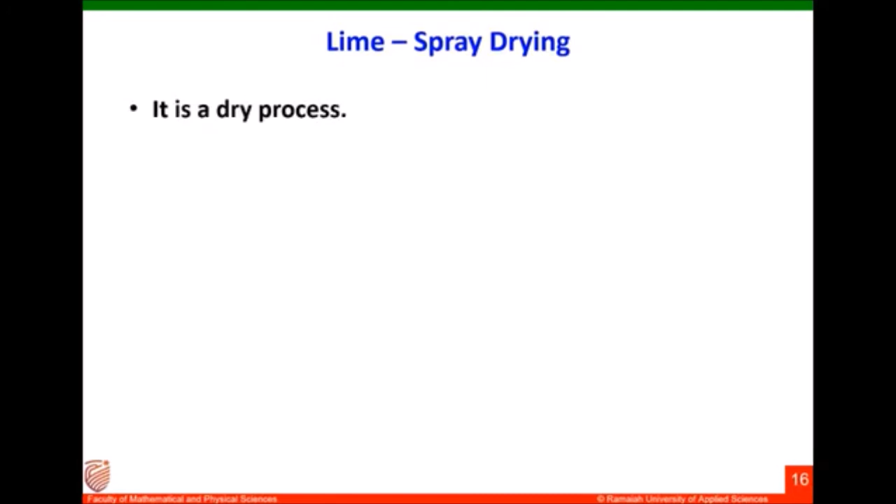The fourth technique is lime spray drying. Unlike lime scrubbing and limestone scrubbing, this is a dry process. Lime slurry is sprayed into the chamber, then sulfur dioxide in the flue gas is absorbed by the slurry.

The liquid to gas ratio is maintained such that the spray dries before it reaches the bottom of the chamber, supplied from the top through a nozzle.

After absorption of sulfur dioxide, the lime slurry comes down to the bottom of the chamber, but by the time it reaches the bottom, the water content is gone, so the final product we get at the bottom is a solid product.

These dry solids are carried out with the gases and collected in a fabric filtration unit. The system needs lower maintenance, lower capital cost, and lower energy usage. The final product, sulfur dioxide absorbed in the lime slurry, must be filtered using a fabric filtration unit since it is a powder-like material.

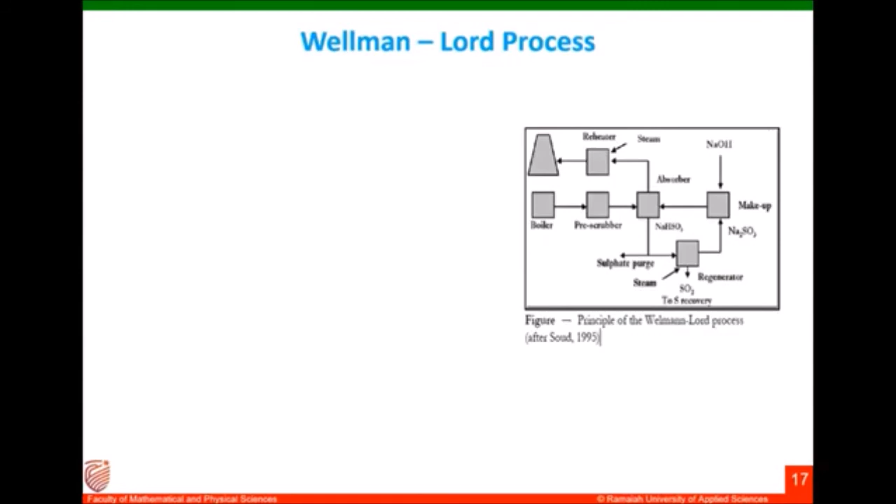The fifth process is the Wellman-Lord process, which is a regenerable process, unlike all the other once-through processes described. That means we can get the sulfur dioxide back after removing it from the flue gases and use it for other purposes. The Wellman-Lord process is a regenerable process to remove sulfur dioxide from flue gas.

This flue gas desulfurization process does not create a throwaway sludge product, so it will not create any product like gypsum or calcium sulfite. Rather, we are able to recollect the sulfur dioxide and the reagent can be reused again.

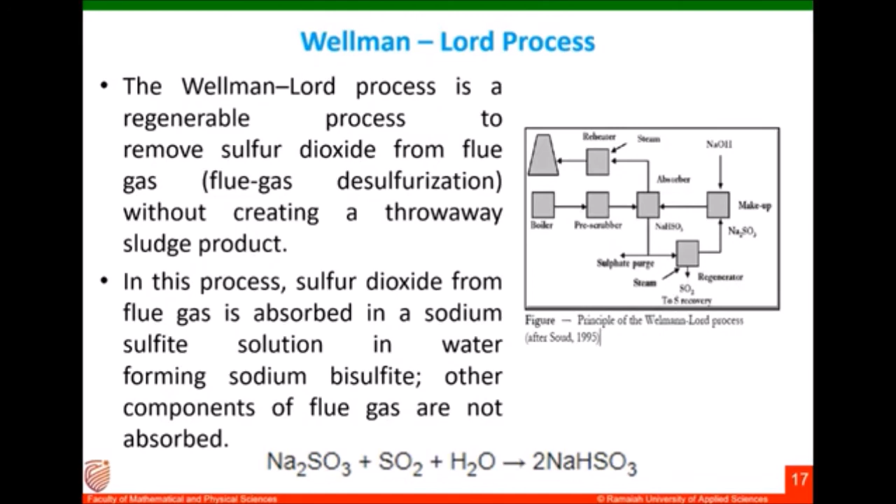In this process, sulfur dioxide from flue gas is absorbed in a sodium sulfite solution in water, forming sodium bisulfite. Other components of flue gases are not absorbed, only sulfur dioxide is absorbed by sodium sulfite, reacting with sulfur dioxide and water to form sodium bisulfite.

Then we reduce the temperature of this mixture, so the sodium bisulfite is converted into sodium pyrosulfite, which precipitates out. As shown in the equation, sodium bisulfite converts to sodium pyrosulfite at low temperature and is precipitated.

Taking that precipitate and heating it reverses the two previously described chemical reactions, converting sodium pyrosulfite into a concentrated stream of sulfur dioxide and sodium sulfite. Sodium pyrosulfite decomposes to sodium bisulfite, which then decomposes further to give back the sulfur dioxide, separating it from the flue gas.

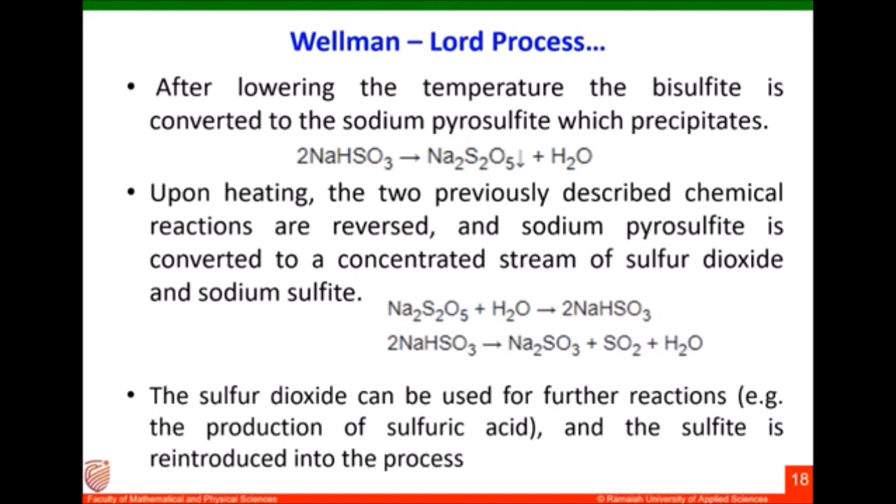This sulfur dioxide can be used for further reaction, as the major reactant for producing sulfuric acid. And the sodium sulfite is recovered and can be used again for the Wellman-Lord process, so you will not be losing any reactants while removing sulfur dioxide from the flue gas.